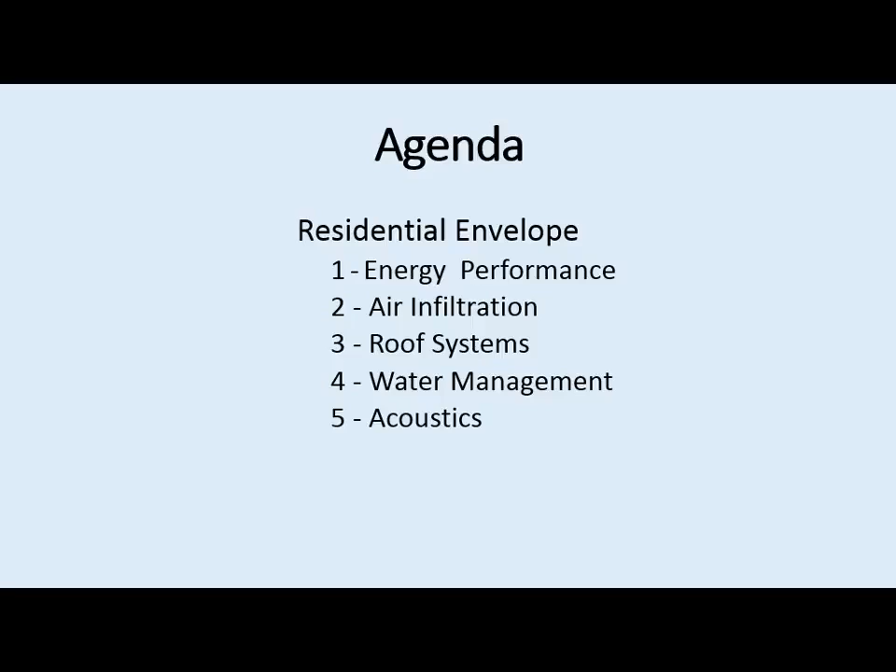I've identified 5 major subjects I'd like to cover, starting first with energy performance of the envelope, and then getting into the details of air infiltration, roof systems, water management, and acoustics.

In terms of energy performance, I've identified 3 major driving forces. First is energy codes, and I've spent a good deal of my professional career in the development of those. We also use economics, driven by fuel prices and construction costs. And we have environmental goals as a driving force for energy improvement.

If we want to talk about energy codes, we need a little clarification on definitions. The basis for energy codes are heating degree days base 65, cooling degree days base 50, and moisture levels - moist, dry, and marine.

Once you define the climate zone, we look at the thermal performance of the envelope in terms of its thermal resistance, or R value, thermal transmittance, or U factor, and the solar heat gain. This applies to fenestration, a term for light transmitting devices - not just a window, but it could be a glass block, or anything that transmits light.

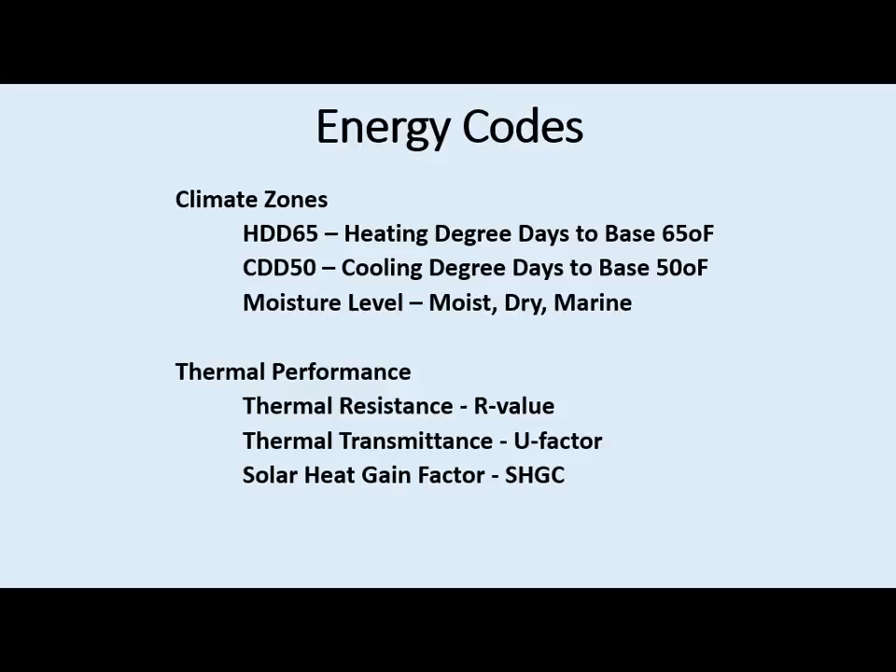So if we look at heating degree days, what are they? Starting with, on the left, we have heating degrees base 65. What does the base temperature refer to? Basically, it's the balance point of the house.

This was determined originally in the 1930s when people were delivering coal to homes, and they were looking for some weather measure to figure out when they needed to make the next coal delivery. They found that 65 degrees was a good correlation temperature, so that was used for many years and has defaulted into our current codes today. But it's by no means the balance point of a house today - a good energy-efficient house will have a balance point of much lower temperature than that.

The way it's calculated is you look at the daily average temperature, shown as a dotted line on the left side for heating, with the 24 measurements for the day, and then the average is the dashed black line. In this example, I'm looking at 40 degrees as the average temperature. Our base is 65, so for that day we have 25 heating degree days. Each day of the winter we add those up, and that becomes the seasonal value.

Well, 24 measurements seems like a reasonable way to calculate the average, but it's entirely too sophisticated. So what's done is they take the maximum and minimum temperatures and average those to come up with the daily average temperature. The reason is that they don't have 24-hour measurements at all the weather stations - they have first-order stations which measure hourly temperature, about 1,000 of those, and second, third, and fourth-order weather stations that only measure max and min temperatures. That defines the heating side.

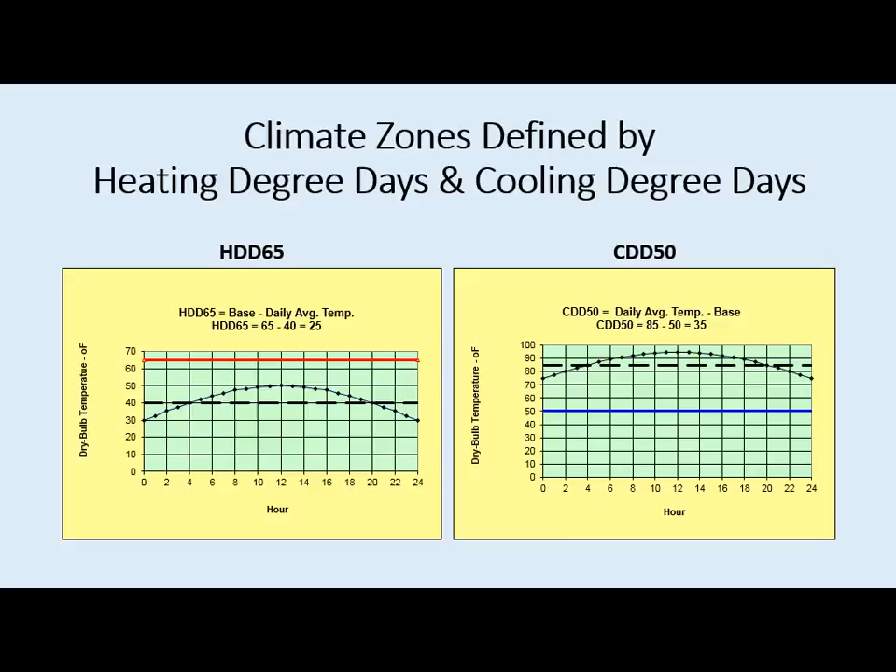But how does that compare to the long-term averages? I looked at the historical data for Columbus - on top we see the heating degree days, and they're quite variable, and same way for the cooling degree days on the bottom.

So for codes work, we use a long-term average. The first set of codes used a 30-year average of the weather data to set the codes. More recently, we've gone to 15-year weather data, and we're seeing a change in what the codes look like because of that.

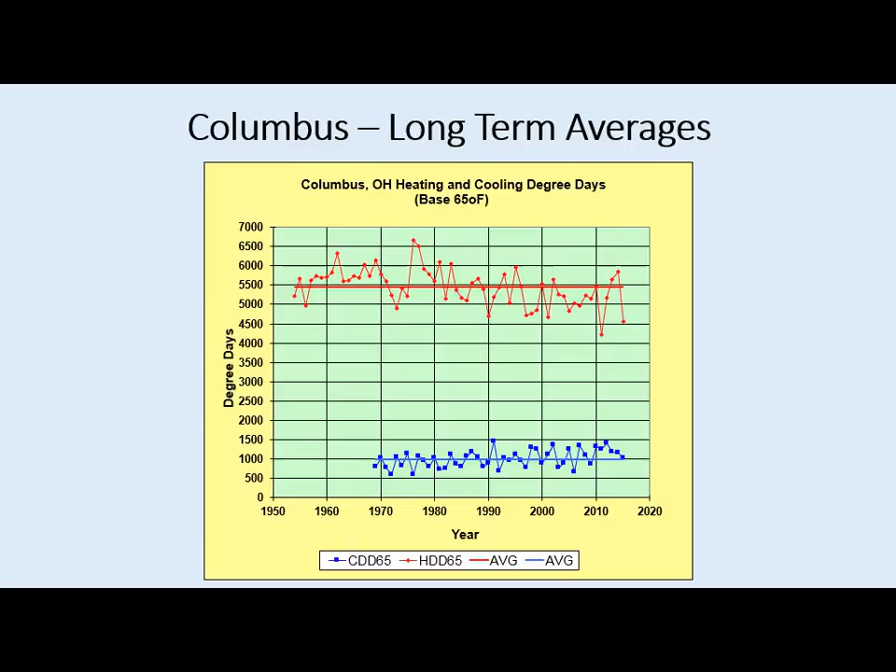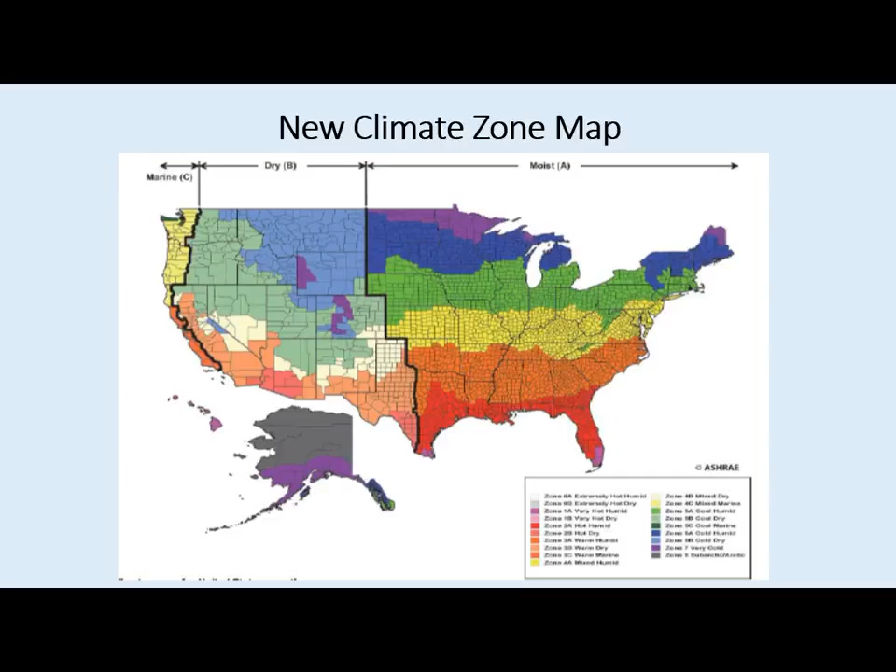So that has changed. There's still the same number of climate zones, but where they are has shifted. For Ohio, what we see is between the old or the current code, which has 9 counties along the Ohio River in climate zone 4, in the new code we're going to have 24 counties in climate zone 4, Franklin County being one of them that has changed from climate zone 5 down to climate zone 4. So it's gotten warmer in Columbus. That changes the criteria.

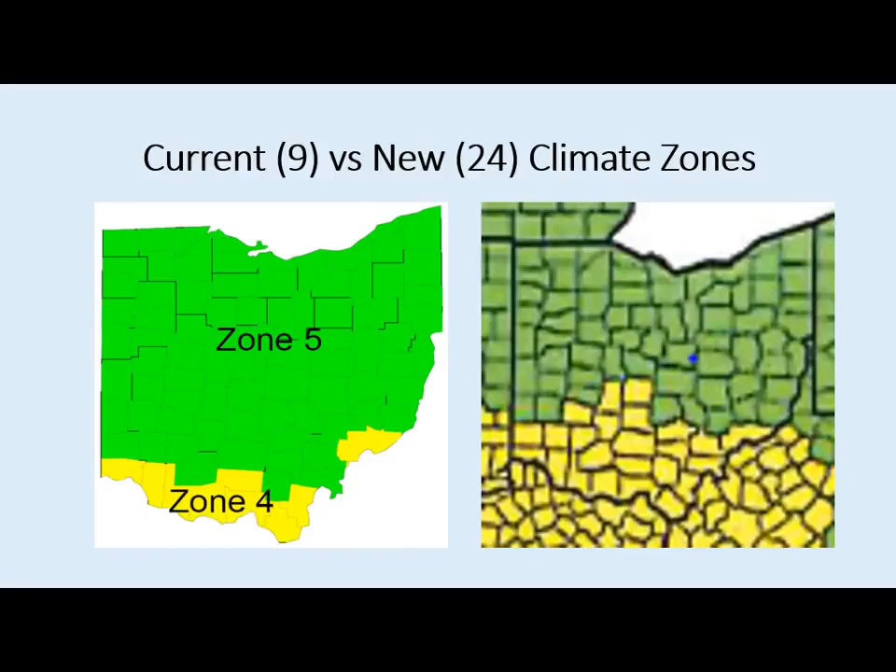The way we represent that is a map showing heating degree days on the horizontal axis, cooling degree days on the vertical axis. I plotted 4,000 plus stations in the U.S., and in the center of it are all of the locations for Ohio. The little yellow triangle shows the original version of Columbus, and the dot shows the current version. It just crosses the line at 5,400 heating degree days. That's what changed it from climate zone 5 down to climate zone 4.

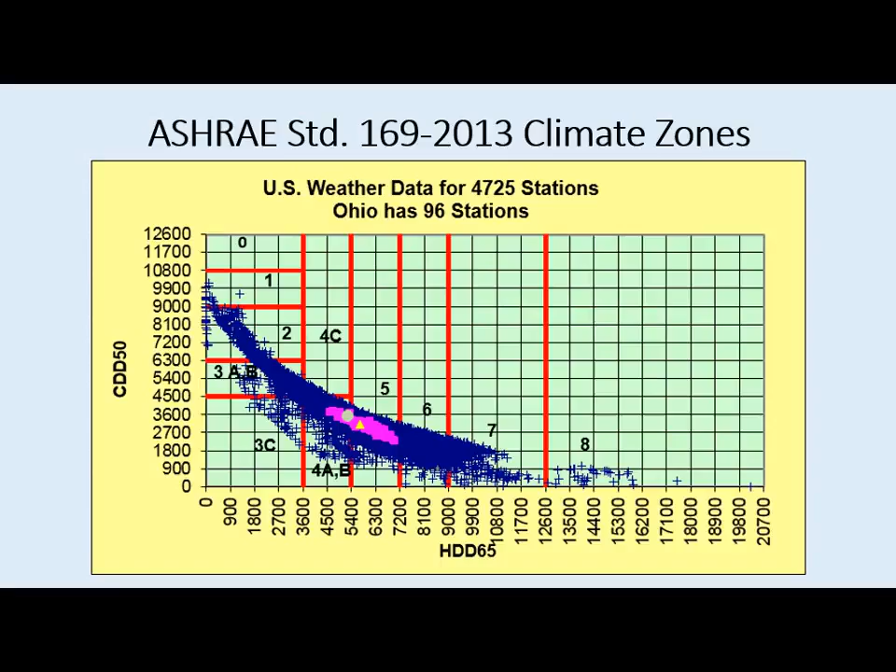So if we look at the first energy code in the United States, it was published in 1975 following the 1973 energy oil embargo. The goal was to eliminate the lowest 20% of the housing stock that was being built at the time. That was developed by a committee within ASHRAE of 100 people, 10 subcommittees, 10 people on each subcommittee, and they used professional judgment to set that criteria.

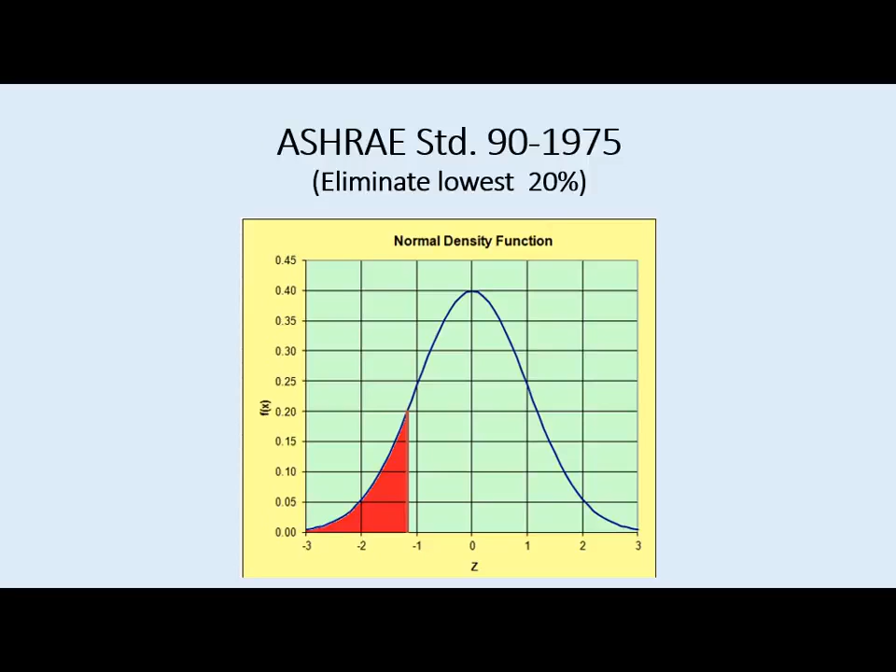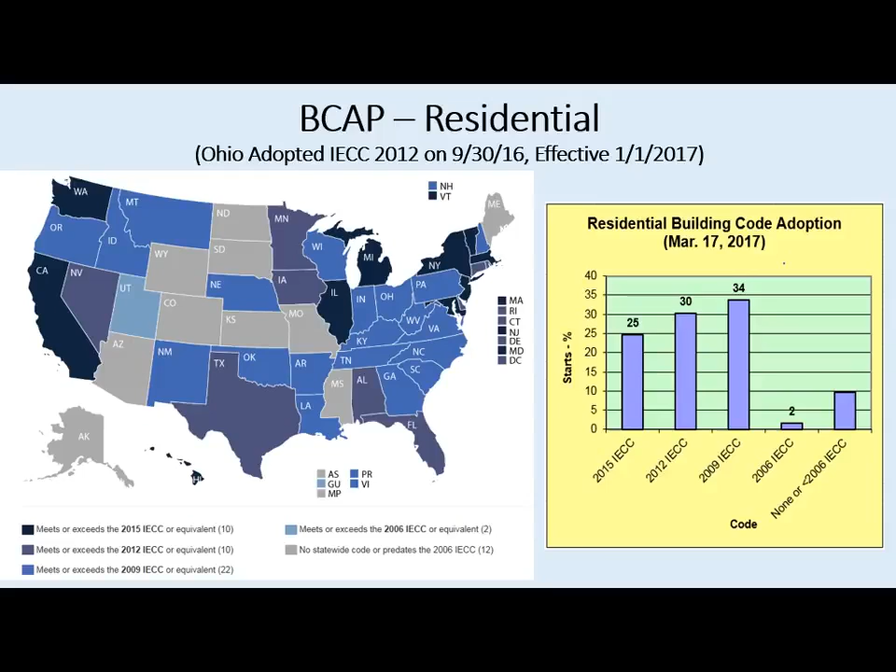So we see that the predominant adoption is still at 2009. We're seeing increases above that, but we also have the laggards. We have a couple of locations where they're using the 2006, and then we have about 10% of the housing starts are covered by no code at all. So there's still a lot of opportunity for improving energy performance just in code adoption. This has become a recent focus of the Department of Energy to encourage states to maintain current versions of energy codes.

An 8-inch concrete block has an R value of about 1. Also, 8 inches of solid concrete has an R value of about 1. So when you build your foundation, you're not getting a lot of thermal protection from the masonry units themselves. Carpet is 2. If you look at a double pane window, we're getting an R value of 3. A 2x4 stud, which is a common construction material, is a little over 4. A 1-inch XPS insulation board is R5. A 2x6 stud is almost 7.

Then you get into insulation, and depending on the density, a 3.5-inch thickness cavity can be 11, 13, or 15. A 6-inch cavity can be 19 or 21, and 12 inches can be an R38. So this kind of calibrates you on the values that appear in the energy codes themselves.

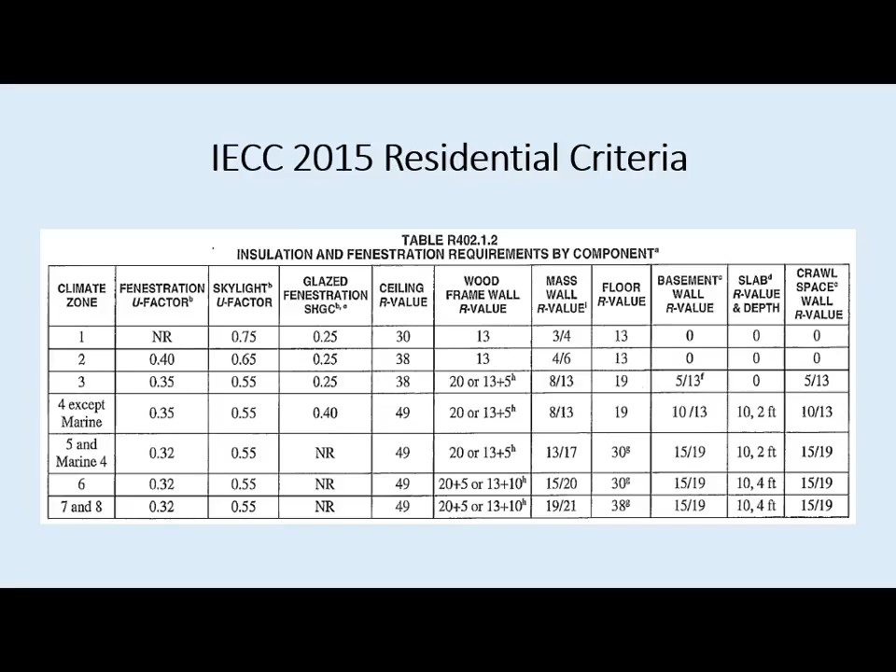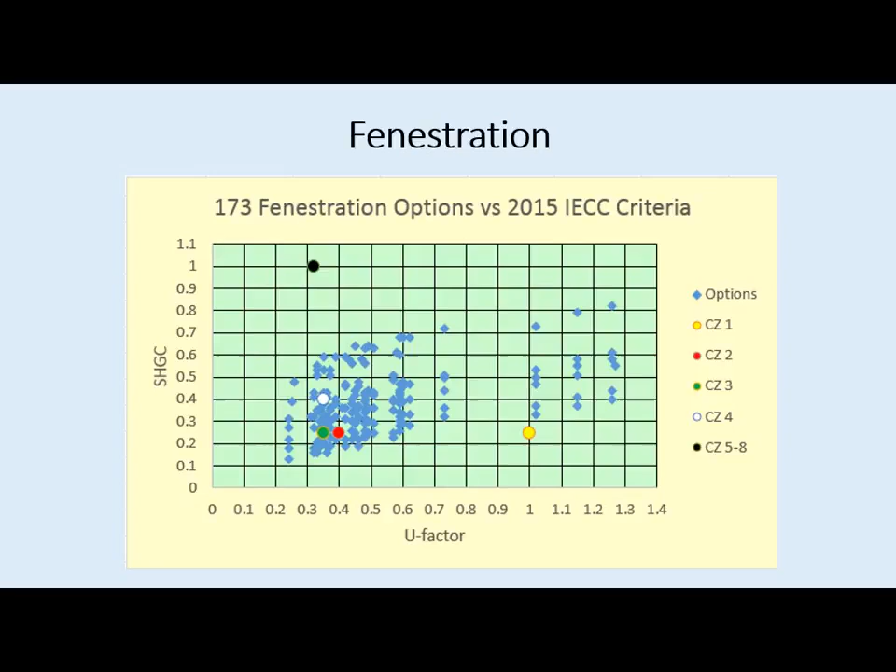We have similar trends in climate zones 2, 3, and 4. When we get to climate zones 5 through 8, we've got the black dot, showing a solar heat gain factor of 1 - there's really no requirement to reduce solar heat gain in cold climates. But to meet the U factor, you're going to have a solar heat gain factor on the order of 0.6 or less. So the codes are set not to limit construction options, but to give you choices.

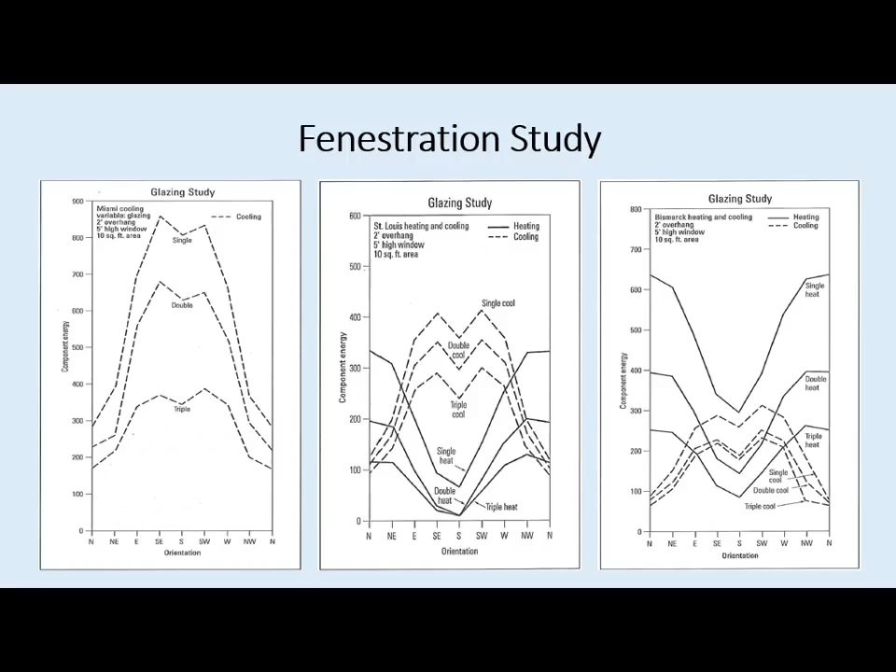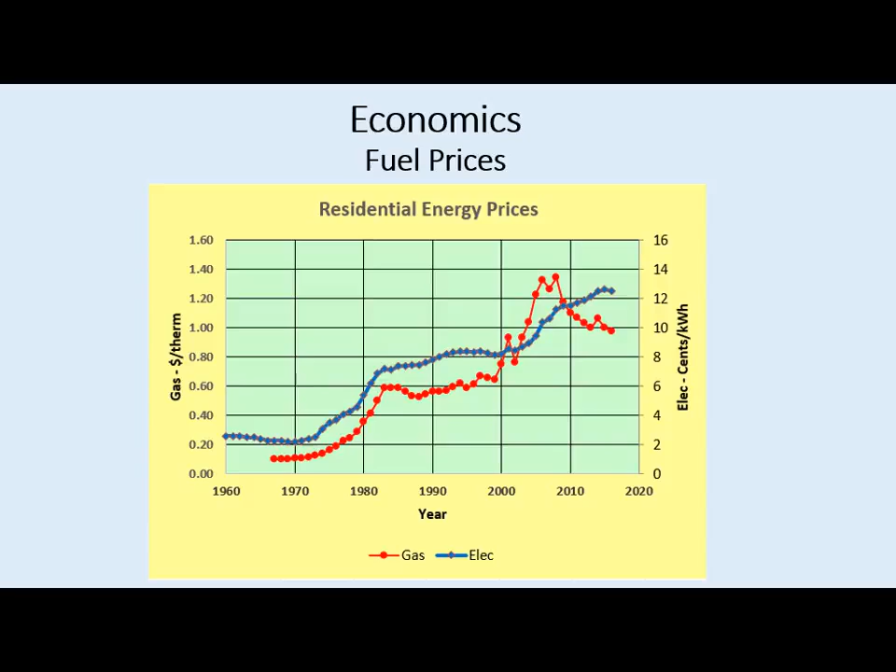Then we see this issue of gas prices - they peaked and have come down. That's been due to fracking and other exploration activities in the U.S. that have lowered our price for natural gas. But we account for that in the development of our codes and standards.

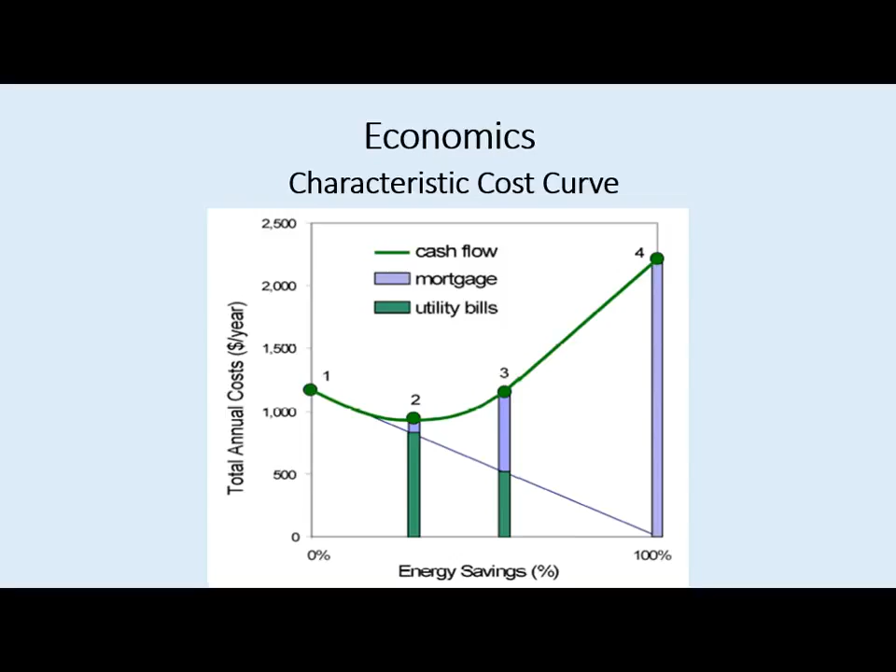We go through that and look at point 2, and that's characterized as the minimum of the cost curve. We look at point 3, and that's where we've reached cost effectiveness of conventional installations. To go from point 3 to point 4 is another step in terms of technology - primarily renewables.

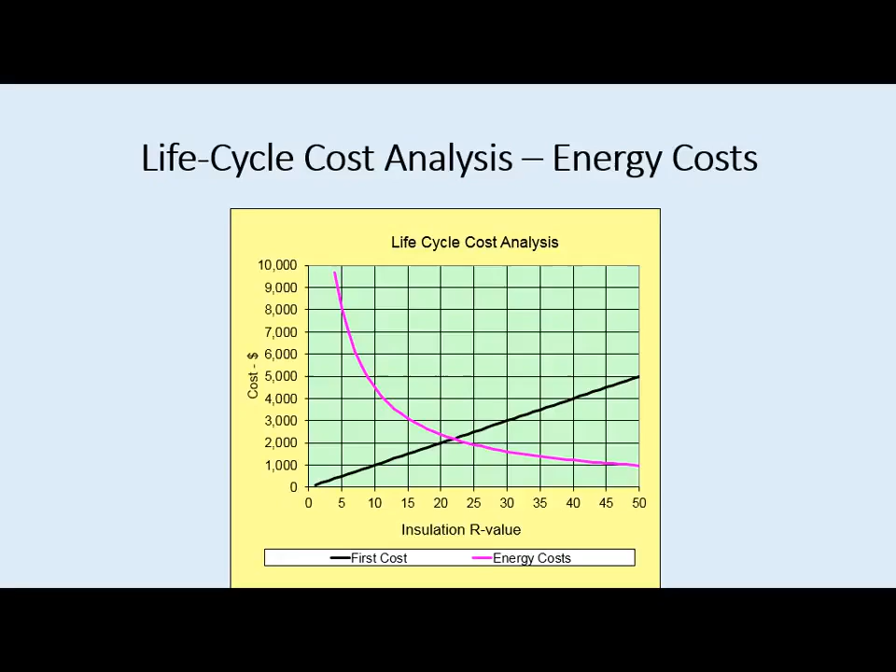These are the life cycle costs. When looking at energy costs, we're looking not just at energy today, but projecting energy costs out 30 and 50 years ahead. If you can do that with any confidence, I'd appreciate having that information, because it's always quite controversial. For first cost, we also look at the impact of assuming it's being mortgaged - interest rates and tax considerations are all accounted for in that first cost curve.

So these are the life cycle curves, and what we do is take these two curves and add them together point by point. We come up with the green line, and that's the optimization curve we use to set the criteria. What we see is that it reaches a minimum point, which we refer to as the optimum - in this case, a value of like R21. We do this calculation for each climate zone because it changes with weather.

What climate zone is this? This is just an example - I think it was done for Chicago.

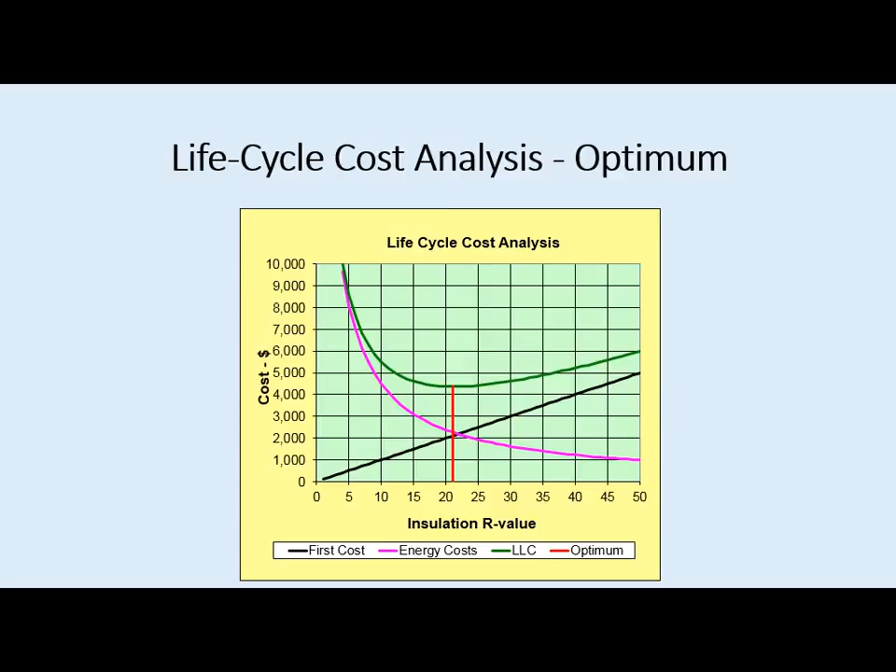When we're setting the codes and standards, we realize that the optimum may not be consistent with how it changes from one climate zone to the next, especially with discrete products. So this is where the committee uses their professional judgment, and we could have options on either side of that optimum. I've shown an exaggerated view of point A and point B. It may not be that far apart, but the point is they both have the same life cycle cost.

So from our perspective in setting the codes and standards, the end user should be neutral. Their life cycle cost is the same. The question is, how does that change from one climate zone to the next? Is there a progression that makes sense?

So we go through and we set those values, and in all the code work we do, we have to send that out for public review. We get comments, and we have to respond to those comments, so we get proposals to change them one way or the other.

So we have two driving forces here. If you're the builder, you want to minimize your first cost, so you'd pick point A. He doesn't care about the utility costs; that's somebody else's problem. If you're the homeowner, you might be concerned about point B. I know that energy prices are going to increase, so I might want to spend more and have those advantages, not knowing with any certainty what the fuel prices are going to be.

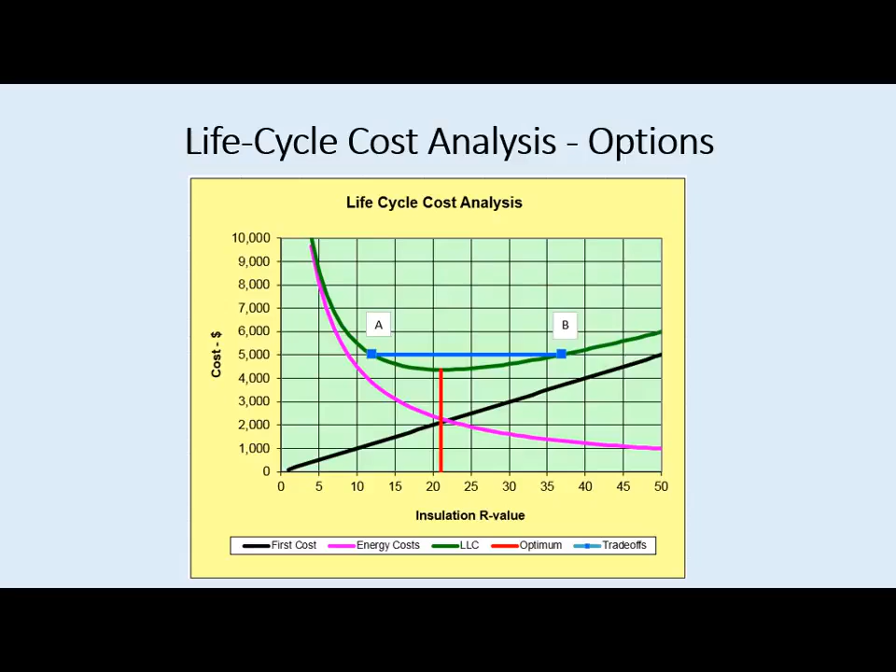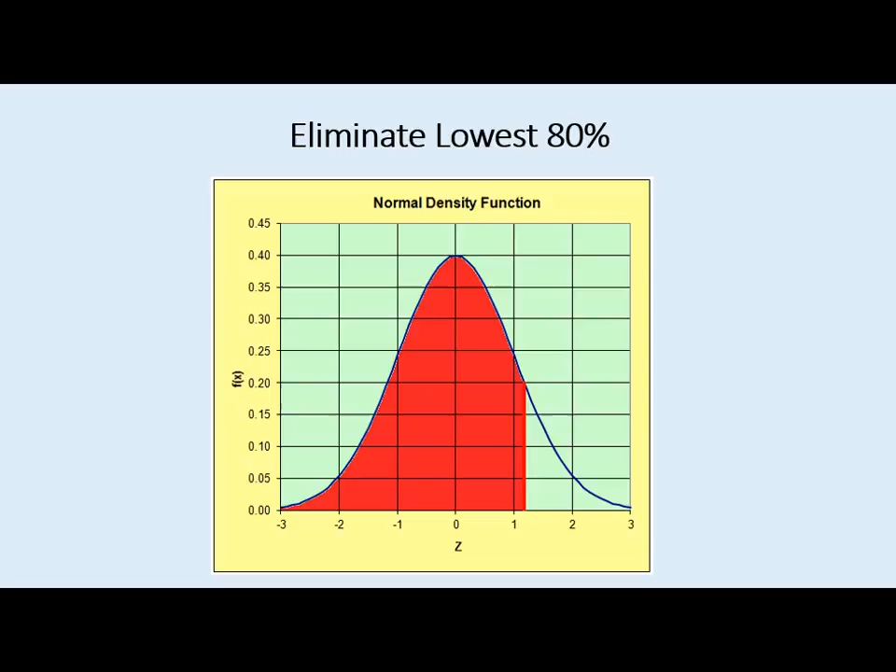So that's the choices we make in setting the standards themselves. In going through that process, we feel that we've designed the home. Now we're talking about the 80% of homes that are normally built. So we're requiring that you're building a much better house today than you did in 1975 just to meet the minimum code. We affectionately refer to that minimum code as legally the worst building you can build. So it doesn't mean it's the best.

So the third major driver is environmental goals for setting codes and standards. The major driver for this has been what's referred to as the American Institute of Architects 2030 Challenge, developed by Ed Mazria from AIA. The goal is to have all buildings be net zero energy by the year 2030. That has been a major driving force in the development of codes. It has been aligned with and accepted by ASHRAE, AIA, USGBC, U.S. Conference of Mayors, and the state of Florida. So this is getting a lot of legs.

So what we look at is what has the energy savings over time been. Starting in 1975, we put this scale together, with the vertical axis showing 100 as the value of the standard in 1975. The standard didn't change for about 10 years, then we saw minor improvements. Then in 2006, when AIA came up with the 2030 initiative, the Department of Energy got involved with ASHRAE, signing a memorandum of understanding saying DOE would provide technical support to ASHRAE if we would work towards this 2030 goal. So ASHRAE embarked on that, and you can start to see a major decline in terms of energy use.

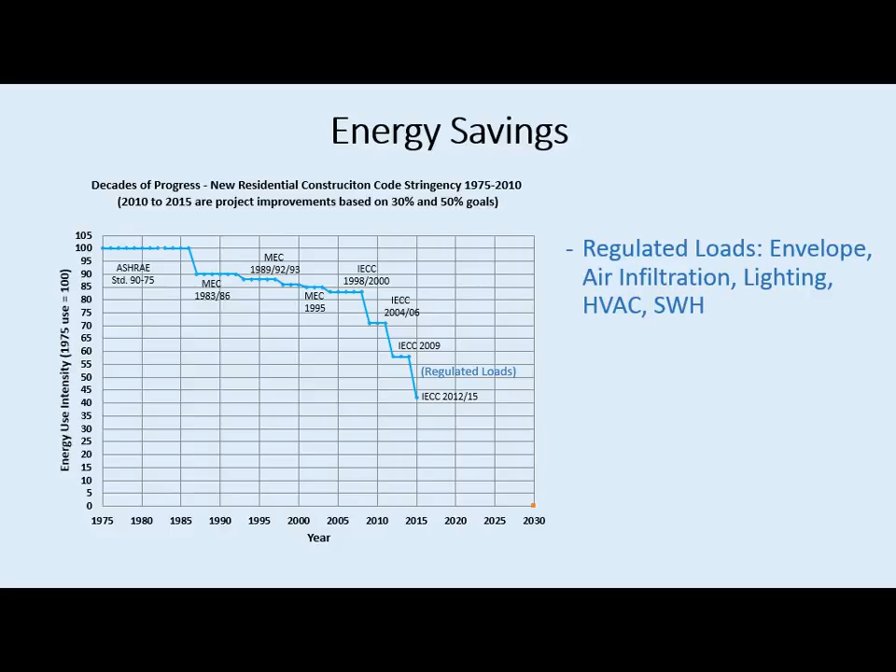That has taken us down to 2015, where we estimate we're around 40 on this scale. So we've saved a tremendous amount of energy with the impact of energy codes, but those only address part of the energy use of a house — we refer to those as the regulated loads, which include the envelope, air infiltration, lighting, HVAC, and service water heating. So what's left? How do we get from where we're at 40, down to this red dot at 2030, which is zero energy?

Well, the first step is to look at what we call plug loads — that's anything you can plug into the electrical outlet, so it'd be refrigerator, ovens, microwaves, a whole list put together. It may not be all inclusive, but one thing you can do is make those Energy Star selections, and that will help achieve energy performance. But they're not covered by the Energy Code. That's something the homeowner has to do after they move into the house.

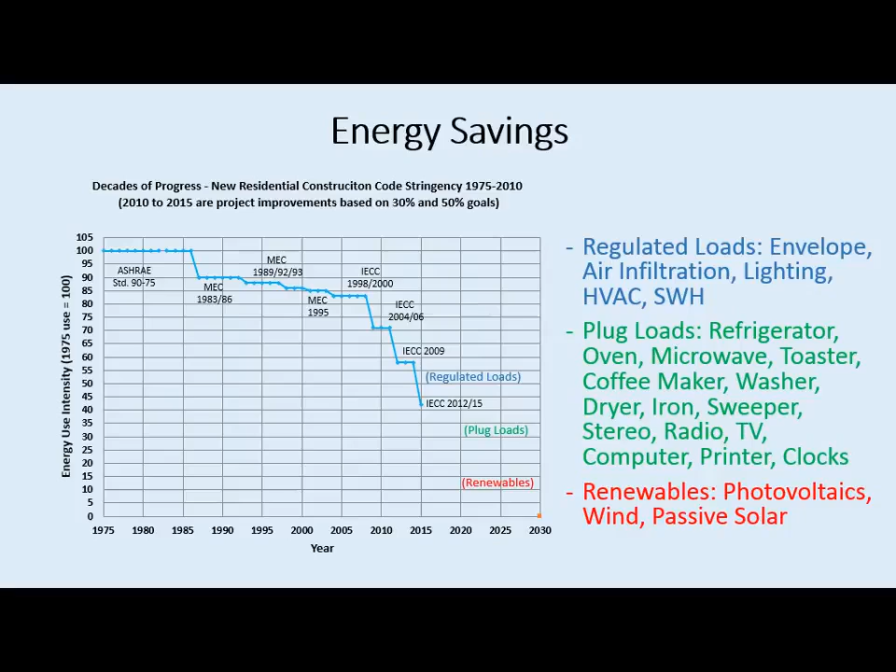So that'll take us down to some level. I don't know what it is yet, but to finish it off, we're going to have to go to renewables. And that's going to involve photovoltaics, wind energy, or passive solar designs. So those are the challenges confronting the codes and standards development.

So what do we do in terms of specific construction? Looking at particular options, we have concerns in the codes and standards with thermal bridges. A thermal bridge is a low thermal resistance path connecting two surfaces.

On the left, what I've shown is a typical 2x4 wood frame wall. We see that we put R13 in the cavity, and we have the wood framing member at R4. So collectively, those perform at about a composite value of R11. You add other construction to that - sheathing, siding, drywall, air film coefficients - and you get an overall performance of 18.6 for that wood frame wall.

Now you have an option - you could build it out of steel. When I first addressed this problem around the year 2000, I got a call saying, well, that steel's so thin, I'm just going to ignore it and assume I get the full R13 in the cavity. So I dug around in some of our research files and found some tests we had done, and I was shocked at the performance that was realized - that the R13 wall, in conjunction with that steel, performs at about an R6.

And I said, what's going on here? Was the test right? So I checked. Yes, it was correct. Did a little back-of-the-envelope calculation and found out that the steel is a factor of 1,000 greater in terms of its heat transfer than the insulation. So it doesn't take very much steel to create this huge thermal bridge in steel construction.

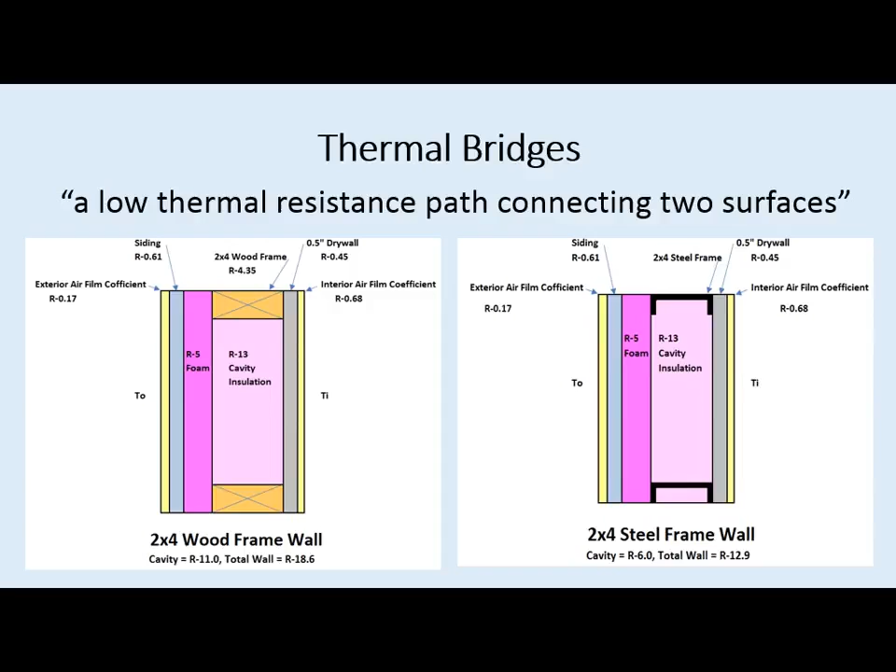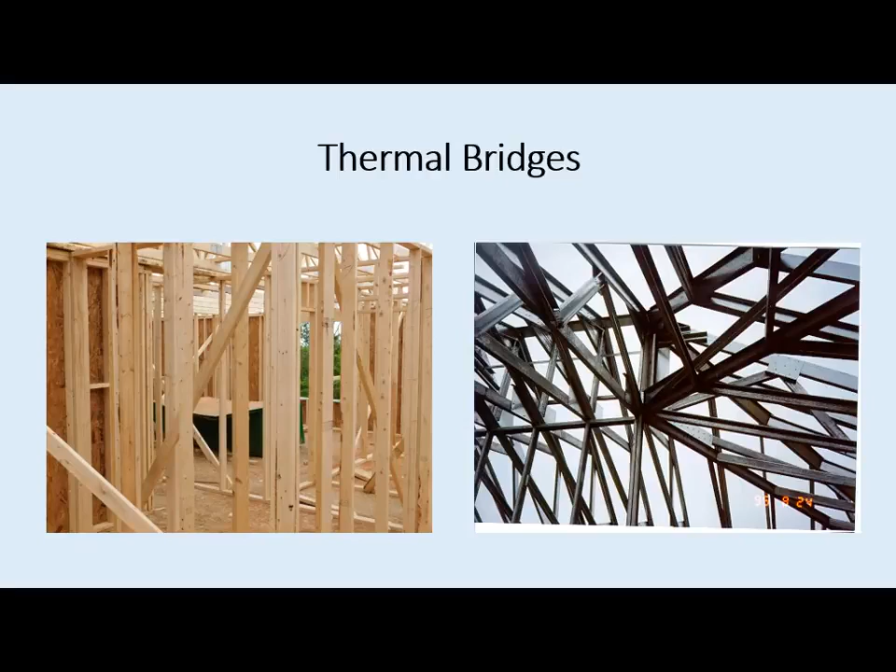So is that important? Well, if we look at how a house is built, we see a lot of wood, we can see a lot of steel. And that's a major difference in terms of the energy performance that's realized.

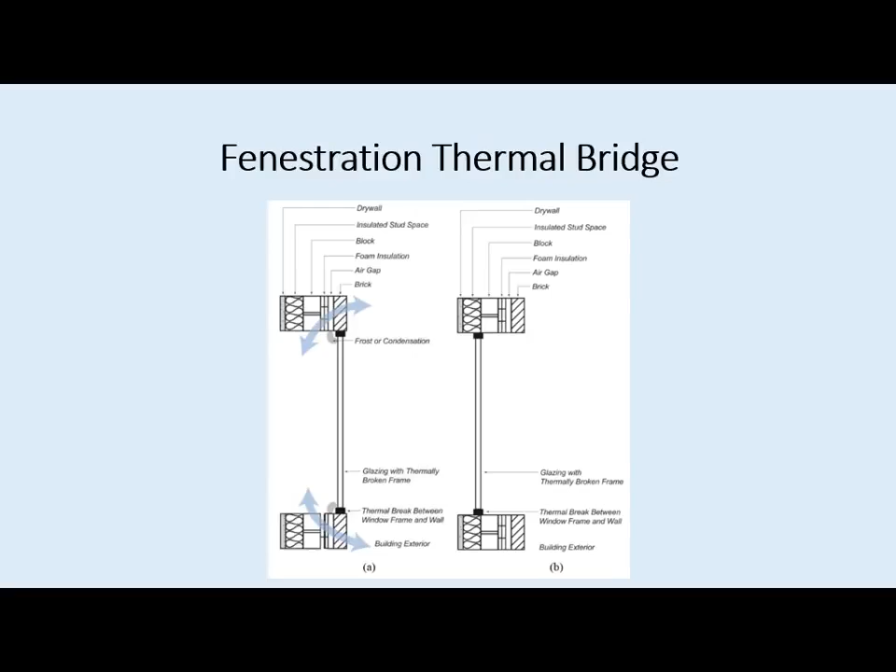Other thermal bridges to consider: when you install a window in a wall, where do you put it? The diagram on the left shows it installed on the exterior. You think, well, that'd be a good place to put it for drainage. But in terms of thermal performance, you'd want to install that in the same plane as the insulation to eliminate thermal shorts, condensation, and those sorts of problems as well.

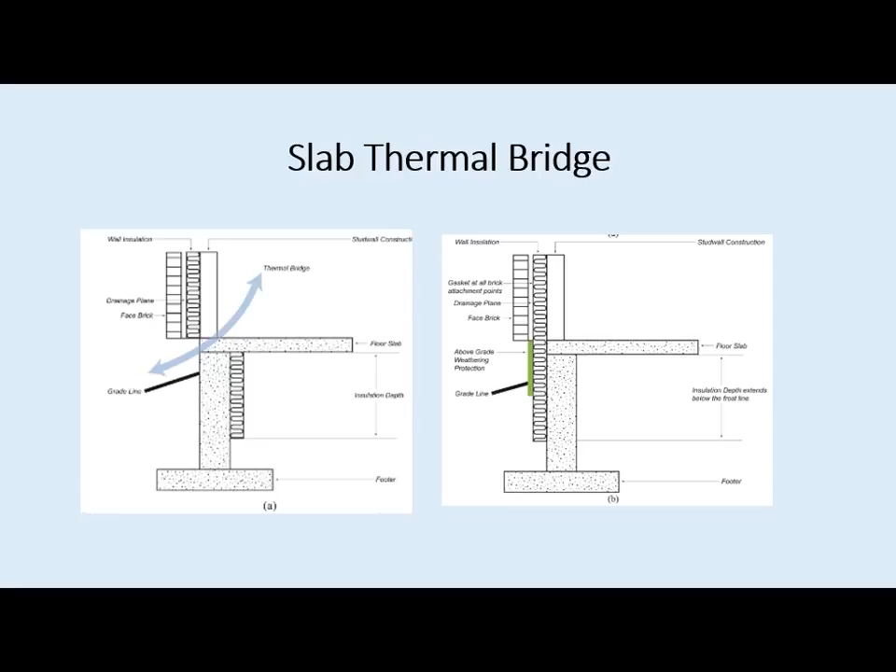Slab edge insulation - you exterior insulate the wall above grade, and below grade you insulate the interior. You think you've added the insulation, but you've created a tremendous thermal bridge, a short circuit. So the best solution is to have the exterior insulation run continuous. In order to do that, you have to provide some sort of protection for that insulation above grade. And a lot of people either don't insulate or don't do the protection right, so that can be problematic as well. But there are solutions to that problem.

Another problem is basement walls. Well, I'll insulate the basement wall up to the grade line, and I've covered 90% of the wall - that took care of that problem. But wait a minute, I told you earlier that basement wall has an R value of 1. That 1 means it's a tremendous heat conductor. So that insulation on the outside might as well not be there - it's doing virtually no benefit. The soil provides benefit; the insulation doesn't add anything to that. So you're bypassing all that insulation on the outside and the soil when you have that exposed above grade.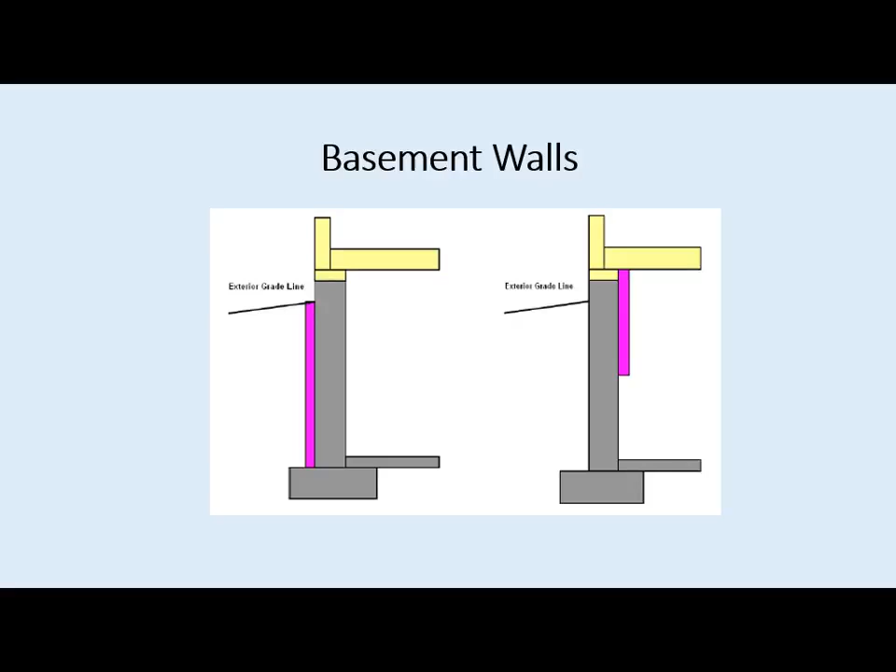Well, let's solve the problem - let's go inside and insulate on the inside, but we don't need to do the whole wall, we'll just go halfway down. Wrong. That vertical wall is R1, so you're just bypassing all that insulation again. So those two things you don't want to do. You think you've done the job right, but you haven't.

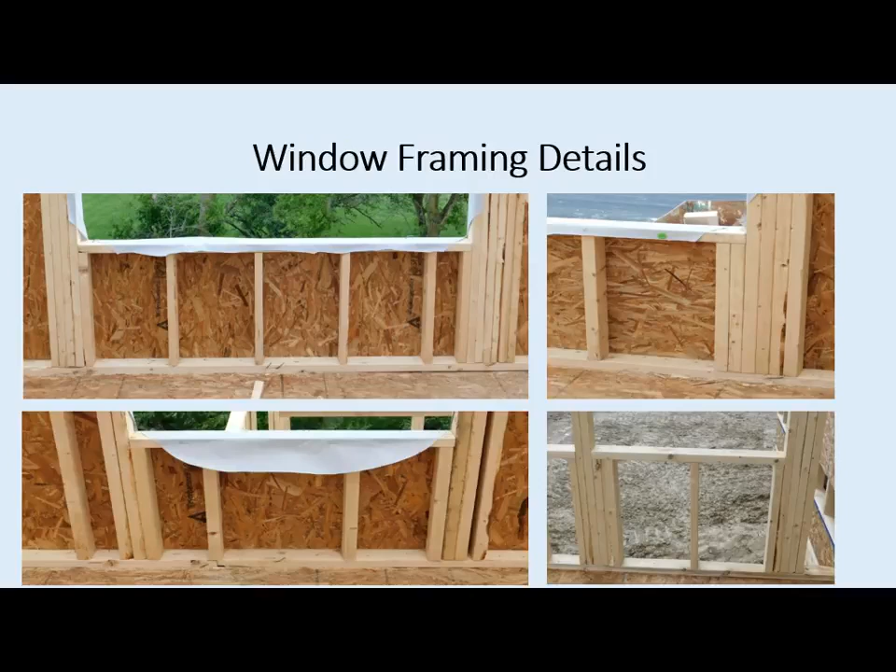You created thermal bridges. Well, I showed you the impact of wood framing. So if you go to a typical construction site, which I did to take these pictures, and look at what's being done today, the amount of wood that's used is incredible. I was amazed at what I would refer to as excess. And there are procedures called advanced framing technologies that you can employ that give you the same structural performance but not near the level of wood framing or these thermal bridges. It exists in windows, it exists in doors, headers.

No matter where I looked, there were multiple stud paths. So are there solutions to that?

Of course. What I've shown here on the left is a corner detail that involves 3 studs. It makes it difficult to insulate and gives you thermal bypasses. On the right is a 2-stud corner. That requires drywall clips to hold the drywall, but it's a technique that can be used, and it gives considerable thermal improvement.

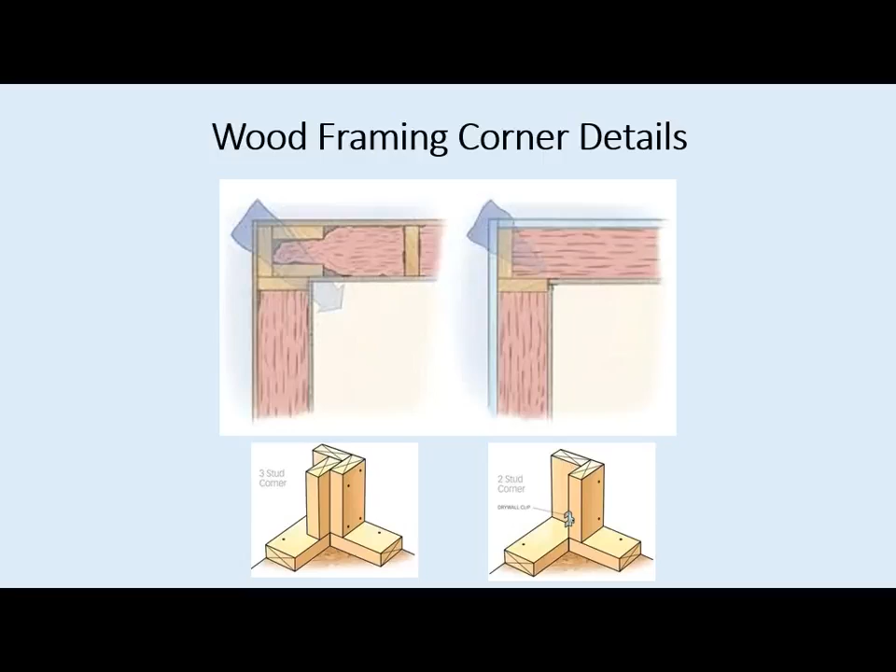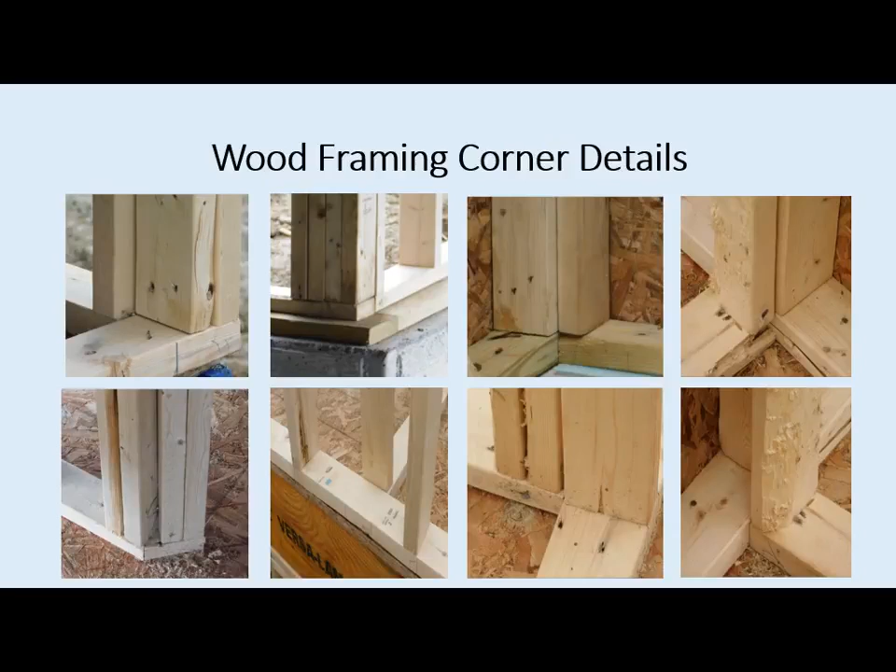So you go out and look at the typical house with all the corner details, and I didn't see any that satisfied what I would call good design. It just continues—the problems are everywhere I looked.

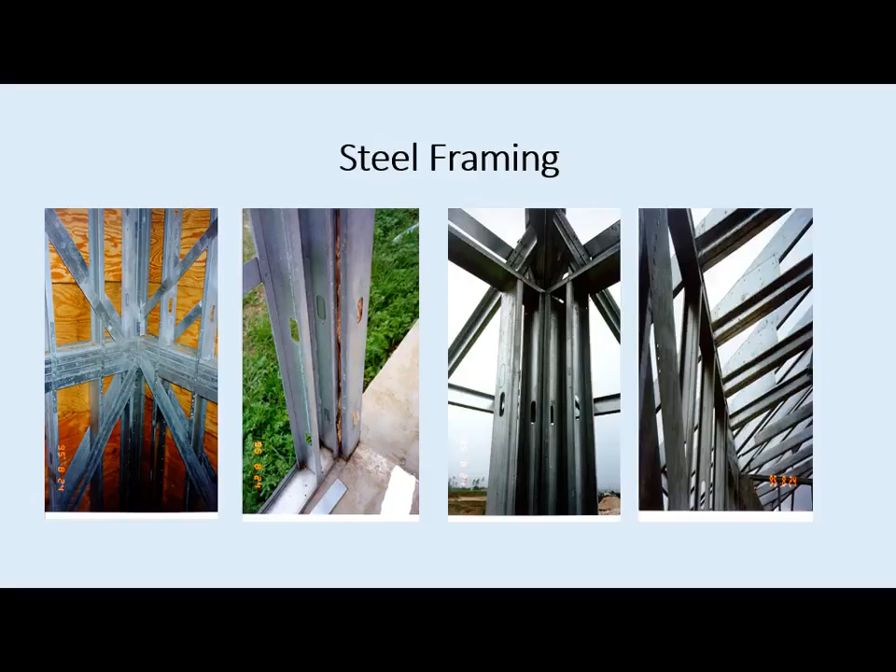Then I thought, well, how does steel look? The picture on the left is a stairwell, and what we see there looks like about 8 steel members. I don't think the front head of the Queen Mary was that strong—it's a lot of steel, a lot of thermal short circuiting, and very difficult to get energy performance in that construction.

So what are some of the solutions? One is if we look at eave construction—on the left we have a standard truss, and it comes down so the top chord sets on the bottom chord at the intersection of the wall. That compresses the insulation, and you install a red baffle bat to provide ventilation, but you're decreasing the thermal performance by having that compression.

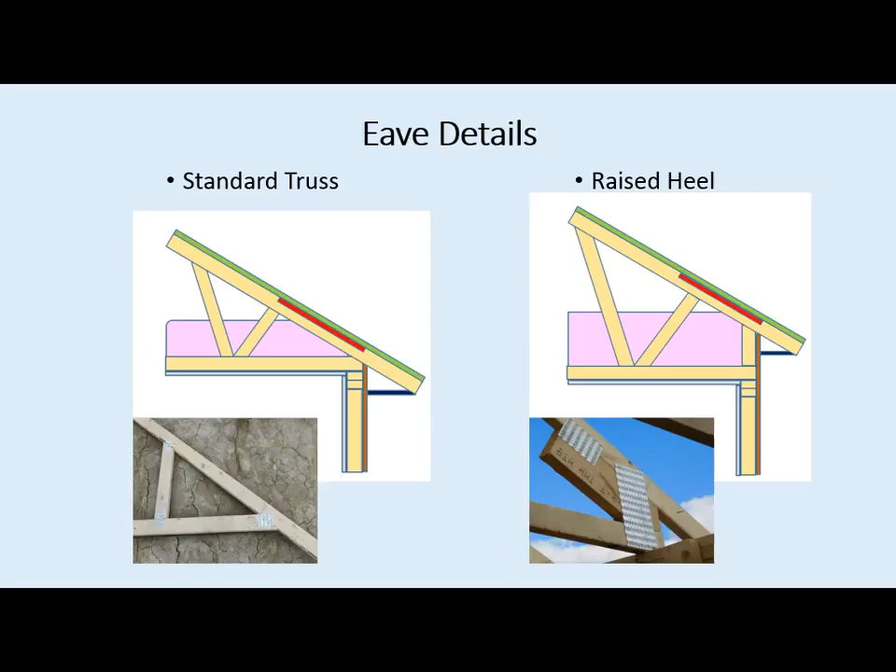So the solution is referred to as a raised heel truss. You build that up, allowing the insulation to become full thickness, clear out to the edge of the wall system, and you get the thermal performance you would expect.

One solution I showed on the 2x4 walls was foam board sheathing. You have options—you can buy a 1-inch foam board sheathing, or 1.5, 2, or 3 inches. In terms of codes, we set a maximum of 3 inches because of how you install something thicker than that. Trying to drive a nail through more than 3 inches is a challenge.

It could cost-justify 4 inches, but they said you can't build it. So if you have a choice, you can buy a 1-inch board and get an R5 in the XPS type of material, or an R6 in the polyiso.

Which one would you buy? Does it make a difference? Well, sure, the R6 is a better performer—I'll take that. Well, let's talk about that.

In the rating of foam boards, the Federal Trade Commission has what they call Rule 460, and it requires all manufacturers to rate their products at 75 degrees mean temperature. So when you do that, the XPS on the left is shown at 75 degrees to be an R value of 5, and the polyiso at 75 degrees is an R value of 6.

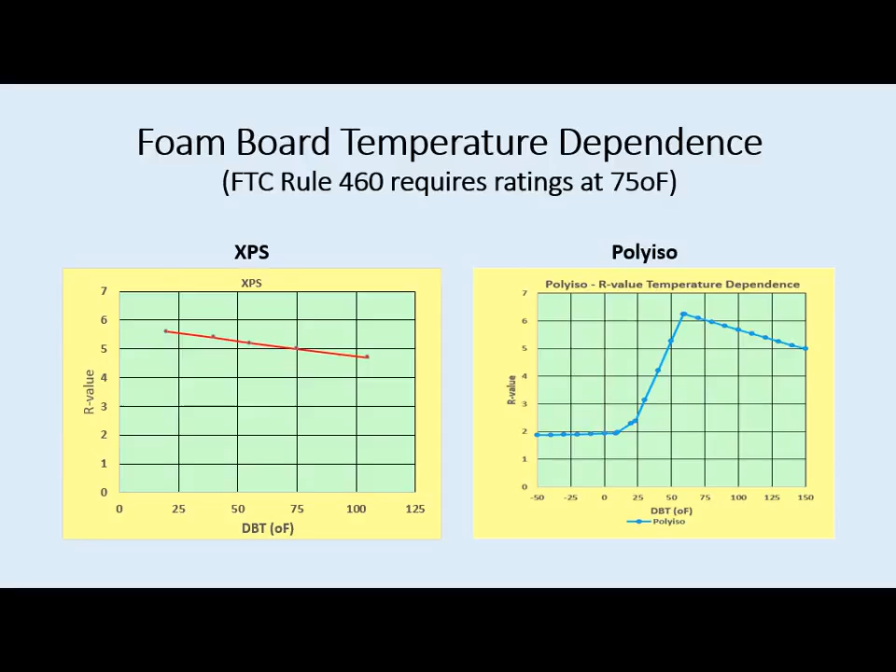But they're also temperature dependent. In terms of the XPS, as it gets colder, its performance improves. In terms of the polyiso, the performance improves up to a point, and then you see this dramatic drop when the blowing agent starts to condense.

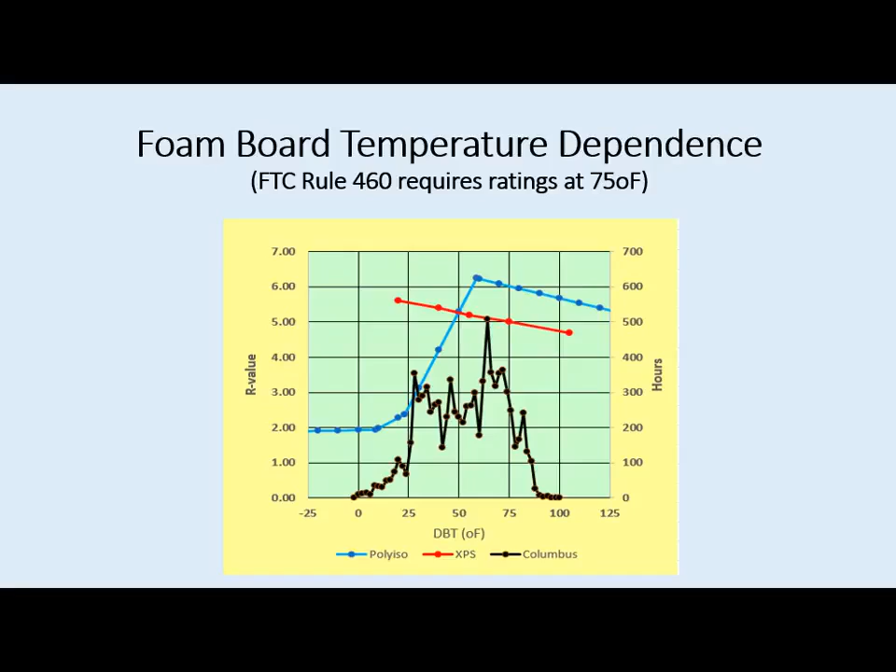We see a tremendous drop-off in the polyiso. So you can go through and do an annual calculation and show that the R5, the red line, gives you better overall annual performance than the R6. So you need to keep in mind product performance, not just at rated conditions.

Yes? I have a home with ICF, insulated concrete form, just 10 inches. How do you compare the performance of insulated concrete form and structural insulated panel to lumber construction?

Well, you have to go through and do that comparison on a U value basis. That's the other part of the standards—they list the prescriptive requirements in terms of R values, but they also list the performance factor in terms of U values. So if you meet that U value requirement, you're in compliance with any material, and that's why that option is provided in the codes. It gives you that flexibility.

So you'd have to go through and do those calculations and make sure you're in compliance with codes. Typically that's not a problem with those types of constructions—they're very energy efficient and have no problem meeting codes.

All right, the second major item I want to talk about is air infiltration. This is the flow of air from one side of the envelope to the other due to pressure and openings.

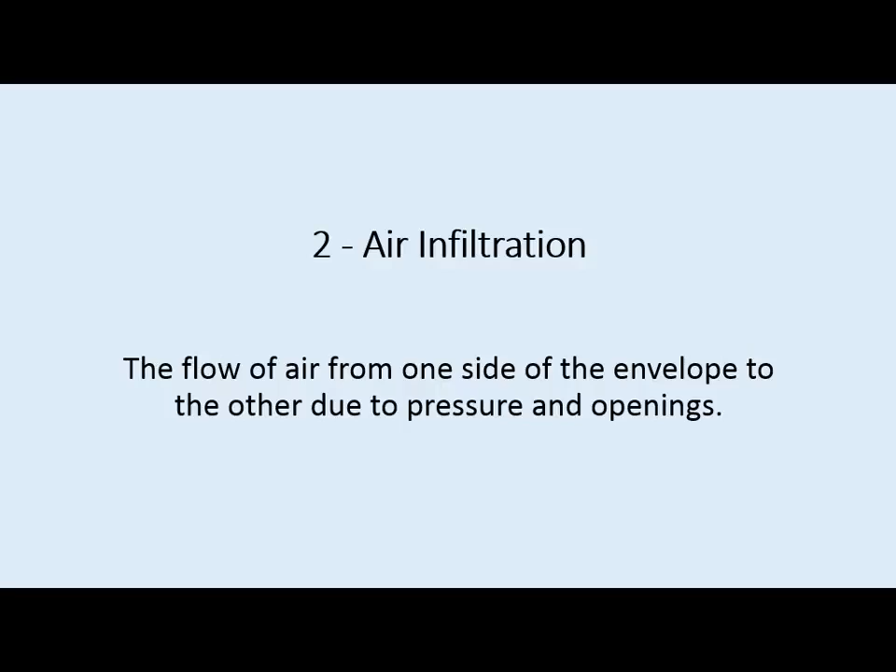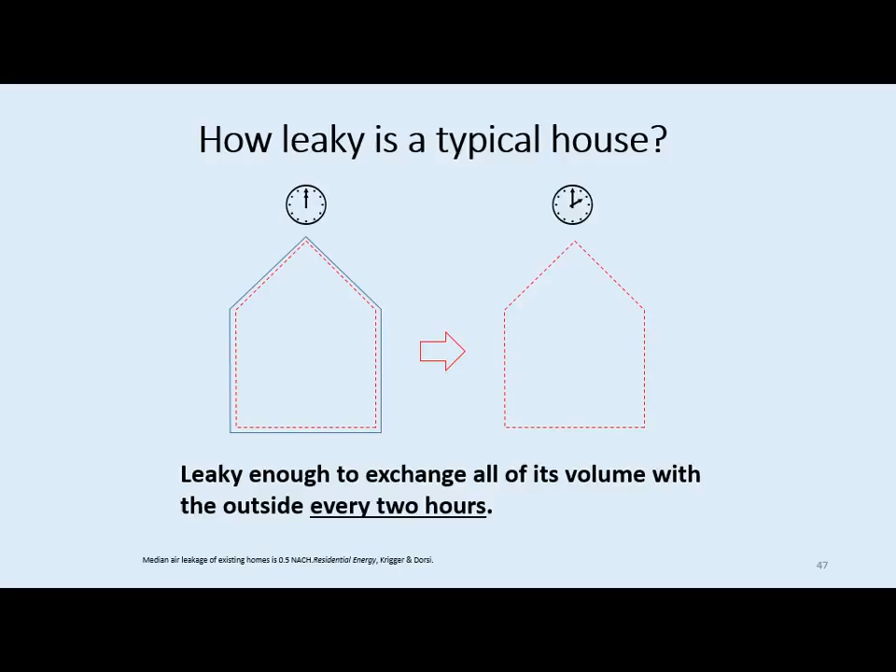So how leaky is a typical house? Well, typically it will exchange its volume every 2 hours, but we're setting codes to be more stringent. So what's the energy penalty? It's a function of climate, size, leakiness, and many more factors. It accounts for between 25 and 40% of the energy use of your house, so it's something you need to consider.

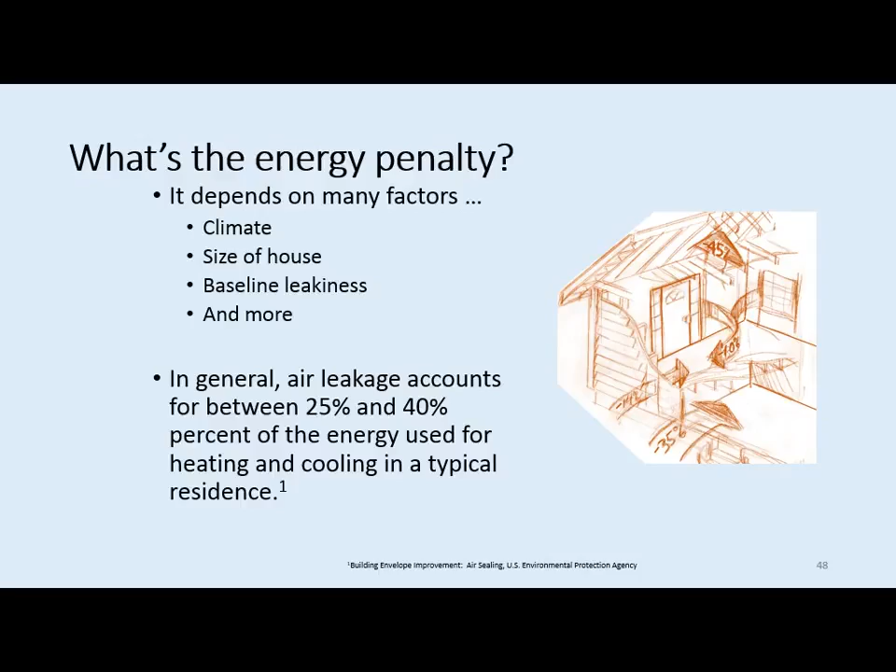So how do you test that? With a blower door. You pressurize your house and take measurements, and now the codes have set requirements. For climate zones 3 through 8, it requires 3 air changes at 50 Pascal. Well, what does that mean?

You have nearly a mile of joints in a house to connect. Which ones are the most important?

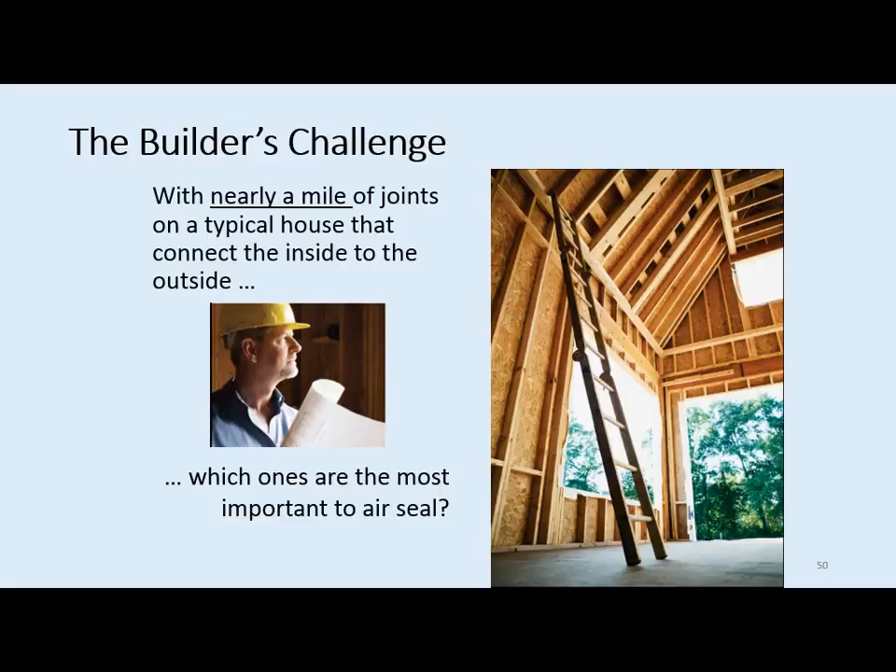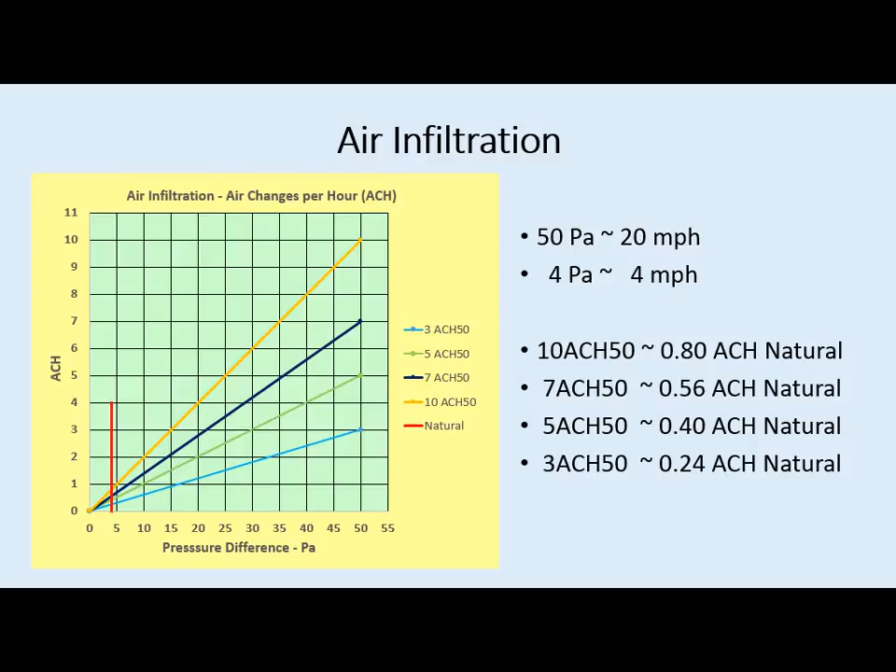The infiltration requirement for the IECC was 3 air changes at 50, and that 50 is comparable to a 20-mile-an-hour wind. Now, you're not going to have that in your house on all surfaces, but it's a pressure test that we do, and we extrapolate those results down to 4 Pascal. That corresponds to about 4 miles per hour, which is more representative of what you'd see in a house, and we refer to that as natural. So at 3 air changes at 50, we're looking at about a quarter of an air change per hour to meet the code.

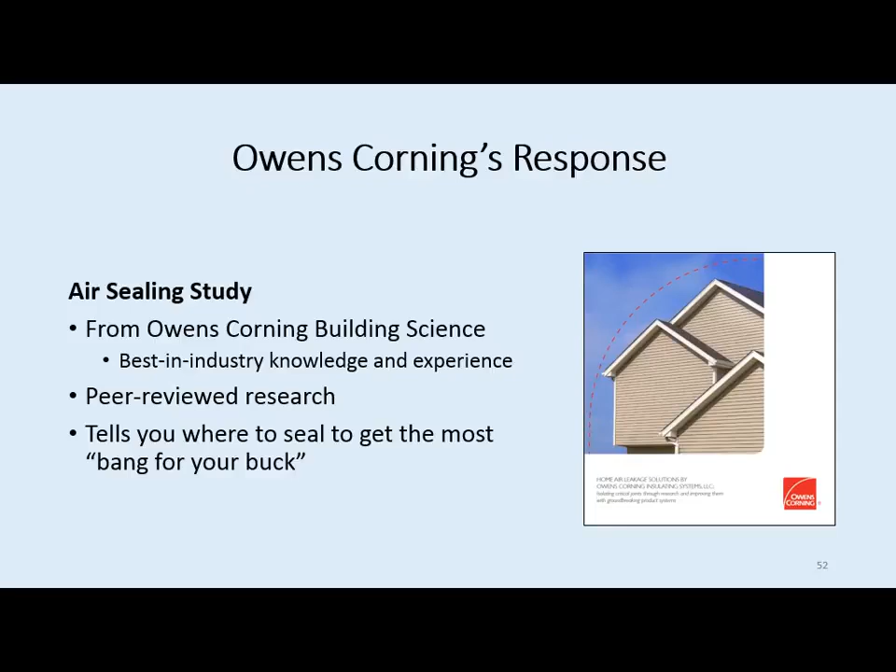The third item is roof systems, and we want to look at how they need to breathe. You need to have ventilation in attics. You want them to defend your attic from moisture, snow, and rain, and you want to seal them from drippage back into the space itself.

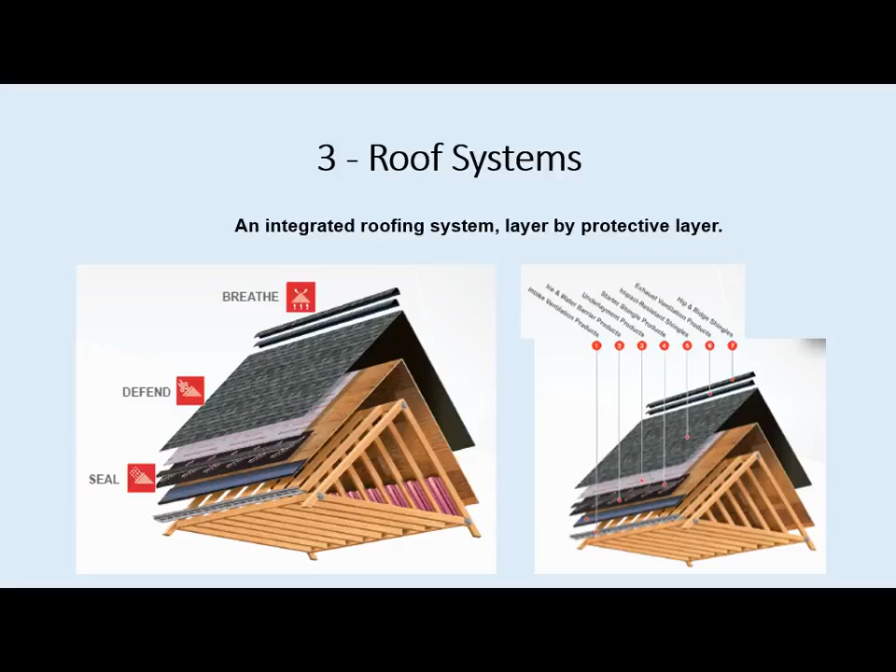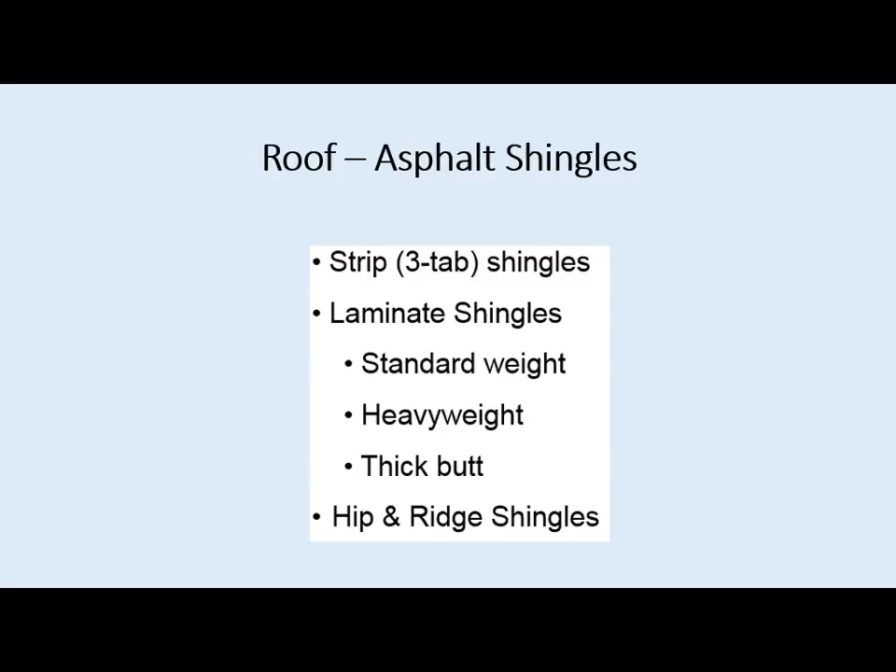So you have choices. In terms of asphalt shingles, you can have a 3-tab shingle, laminate shingles of various weights, and hip and ridge shingles. These give you different levels of durability in terms of length of life.

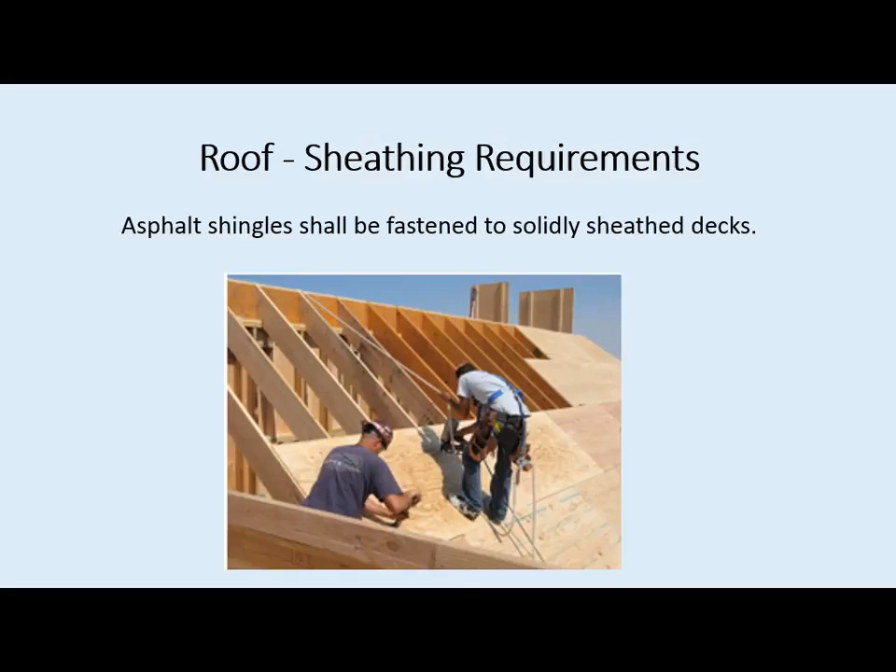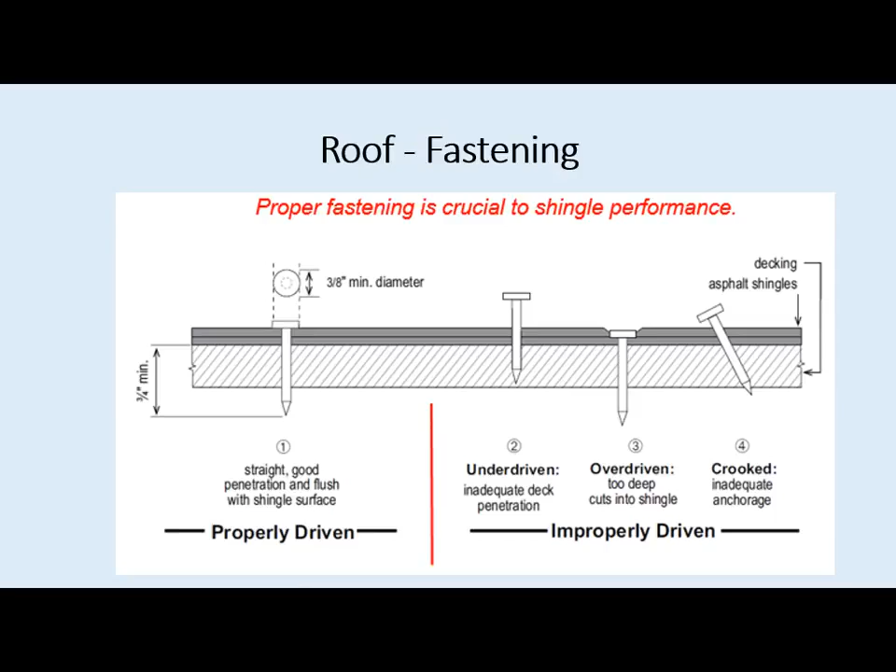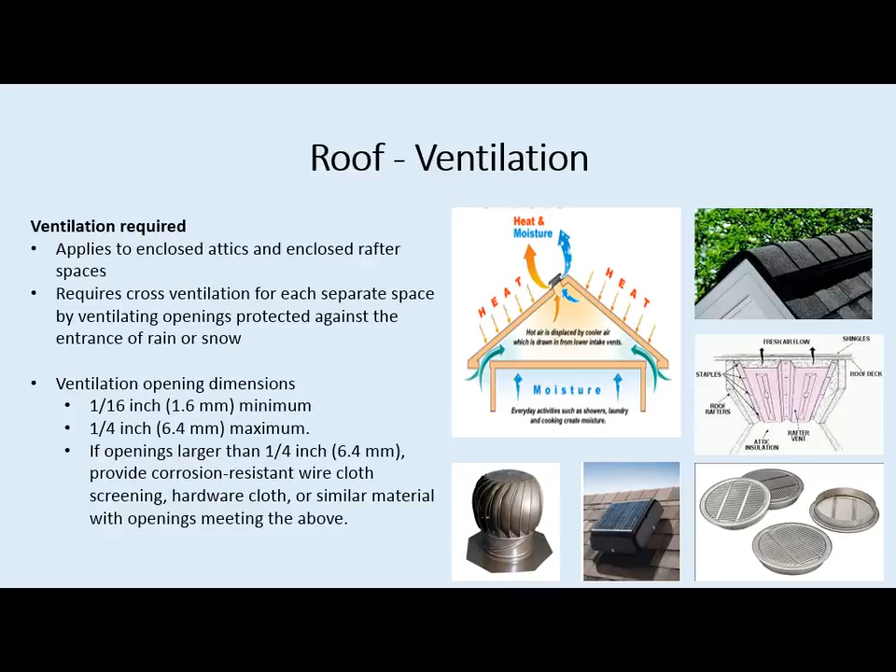Ventilation is a major requirement for roofs, and you do that by having air enter at the eaves—you can have strips or little caps, shown on the right, to provide that ventilation. It goes into the attic space through those vent cavities I showed earlier on the hip roof, then exhausts near the top, which can have ridge vents, shown in the drawing on the right, or little louvered mechanical devices shown below the figure.

We also want proper wind resistance, which changes by climate zone, so different tests are conducted on shingles and different constructions are built for different areas of the country. You need to keep that in mind when selecting materials. You also need to look at impact resistance for hail—you don't want that to destroy your roof—so we conduct tests to protect against impact resistance.

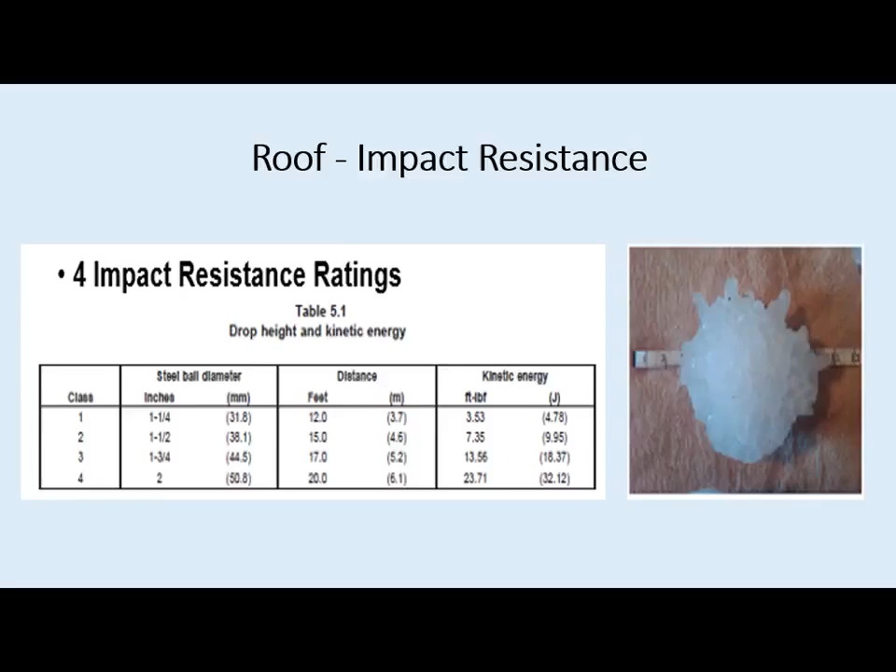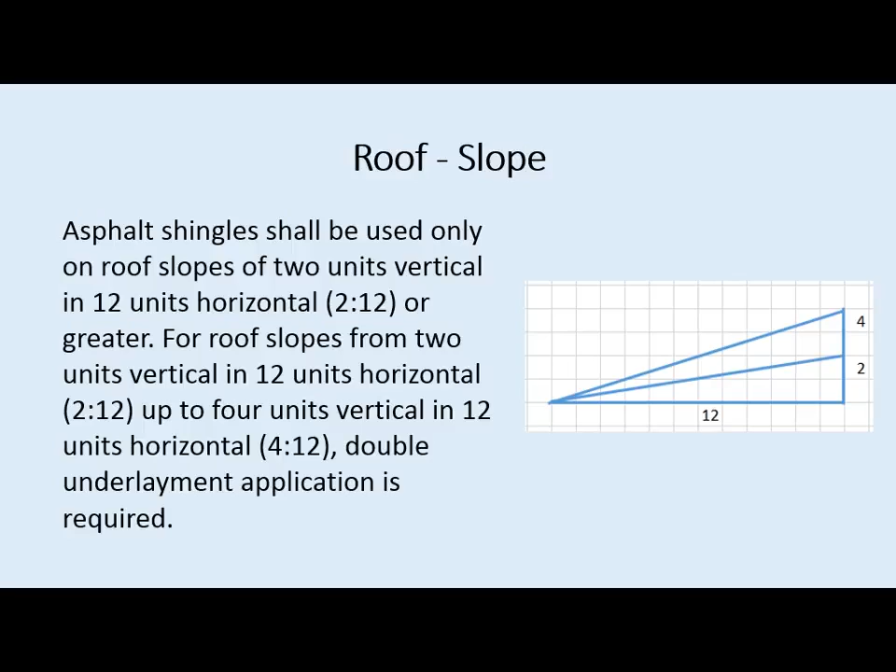Finally, shingles can only be applied if the roof pitch is greater than 2-in-12. Between 2-in-12 and 4-in-12, double underlayment application is required. Above 4-in-12, a single layer is sufficient.

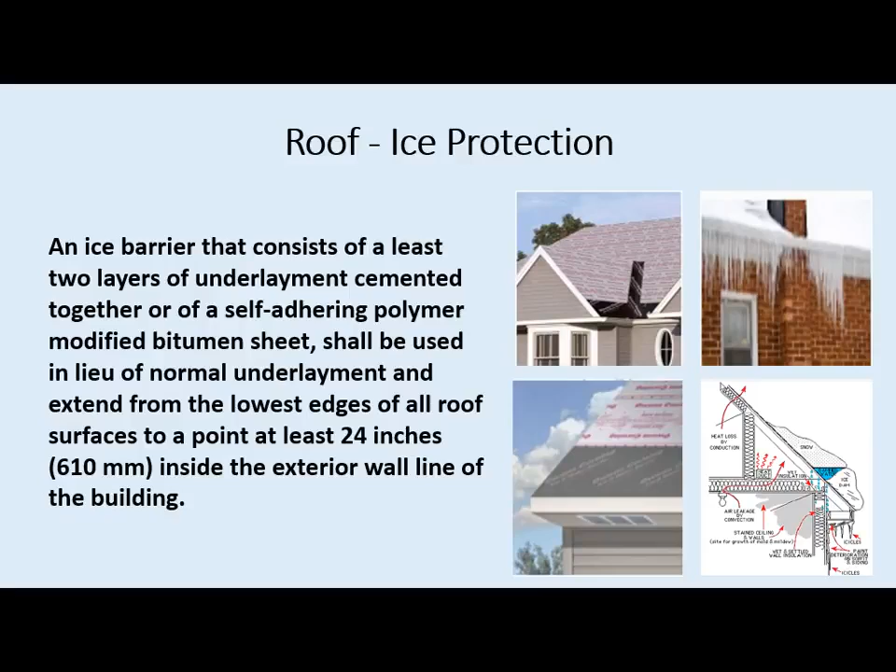You also need ice protection. I talked earlier about ice dams, and if those occur, you'd like to avoid them in the first place. With proper thermal design, you can certainly minimize those, but you want to have drip edge and underlayment installed so that if you do encounter that, the water isn't coming back into your attic. There are details on how that's supposed to be installed. Finally, we conduct tests on fire, another important factor in the design of a roof system.

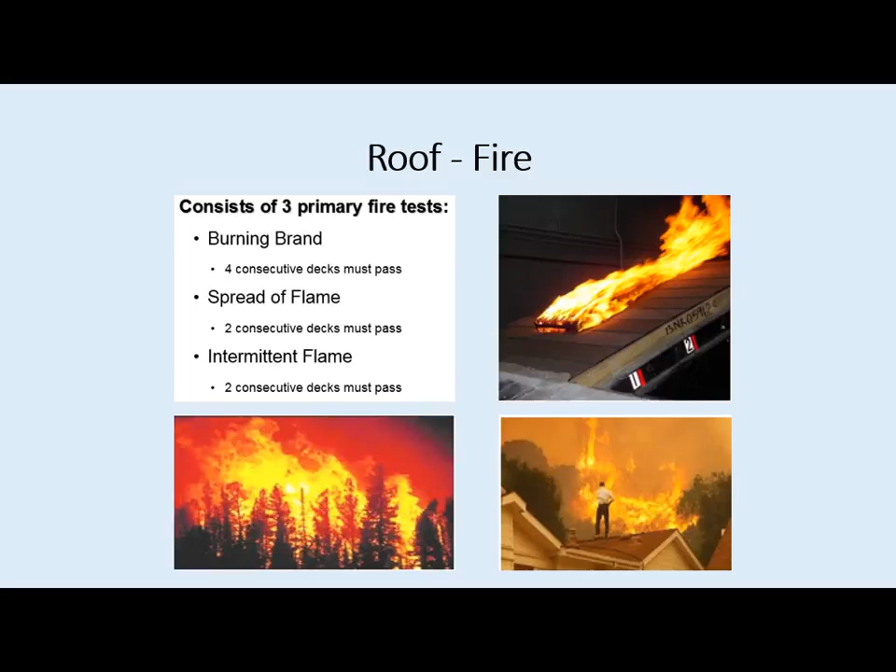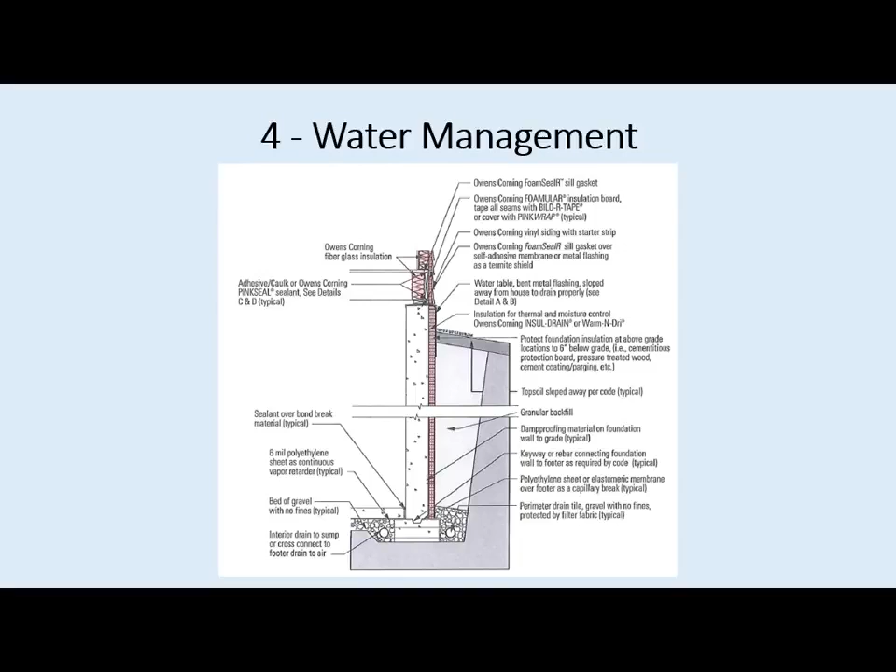Things you don't want to do: take all that water you collected from your roof, run it down your downspout, put a little elbow on the bottom and say job is done. All you've done is dumped all that water at your foundation, and you wonder why you have a wet basement.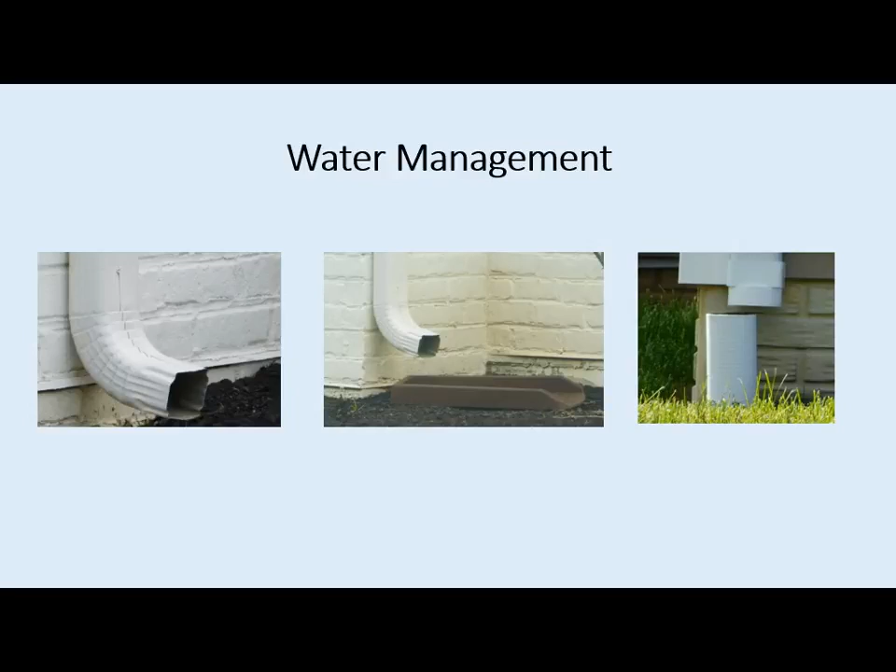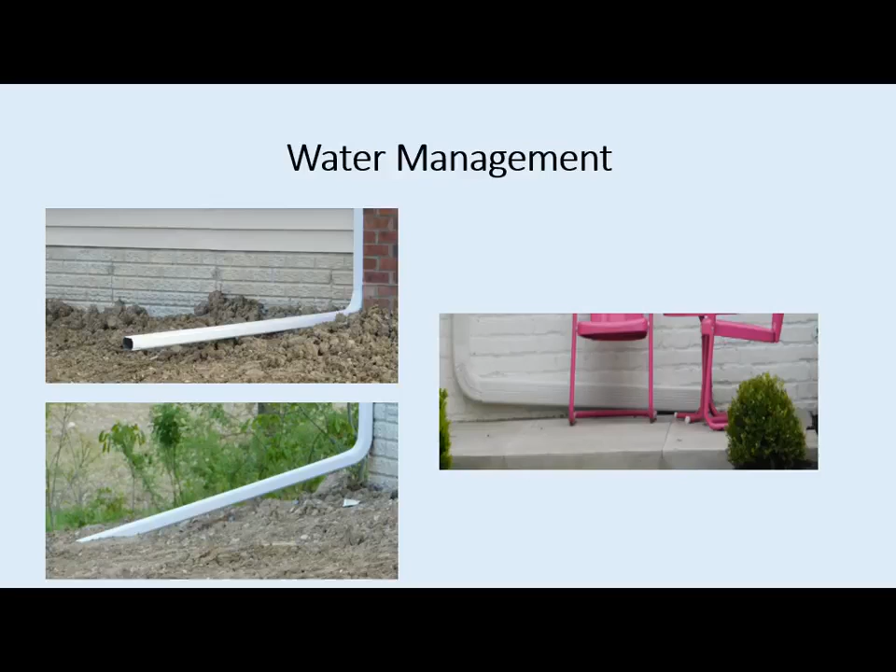Running it a little farther away from the house doesn't necessarily solve the problem either. So it's critical to pipe that water away from the house and connect all the joints that do that.

But there will still be water beside the foundation, so what we recommend is a drainage system on the foundation, applied on the exterior. This is to take the water and have it conducted down to the drains at the bottom of the footers.

The last area I wanted to quickly talk about is acoustics. The problem here is noise is unwanted sound, and the solution is to reduce or block that so it's no longer bothersome.

Now, this is something that most contractors don't design into houses. So if you're concerned about acoustics, you need to do this when you start with your contractor on day one, when you have a blank sheet of paper. Say, here's what I want to design.

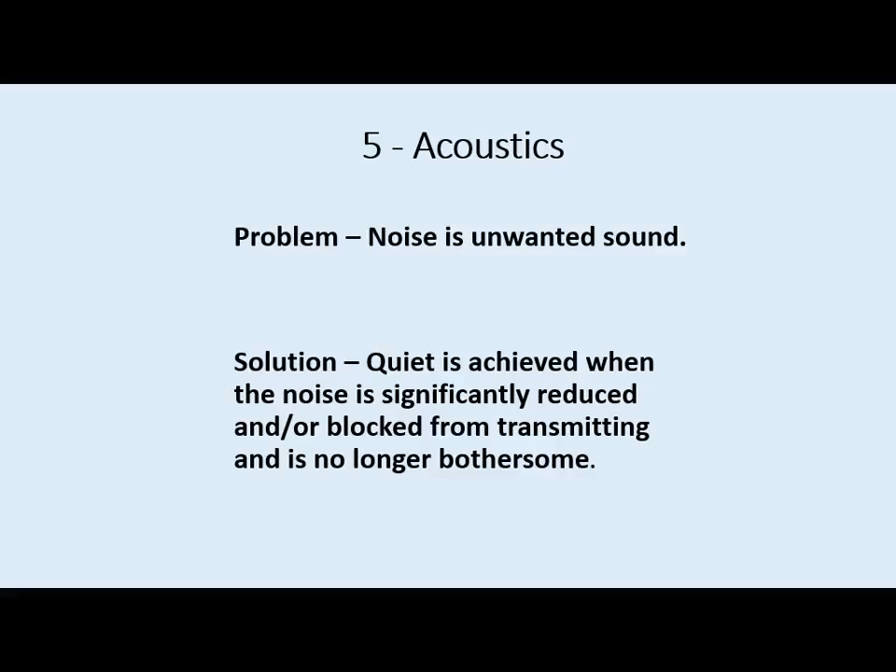So what do you want to do acoustic treatments for? Well, you might have a home office you'd like to have isolated, or isolate your bedrooms, or you have a dedicated entertainment room or home theater.

And where does the noise come from? Well, it can be exterior - traffic, airplanes, trains, lawnmowers from your neighbors. It can be interior - entertainment systems, exhaust fans. And as we're looking at house designs today, they're becoming more open concept, so you see that the kitchen, dining, and family room is just one big space.

There's no separation, so acoustically they're all connected. So you want to watch your favorite sports game, and all of a sudden the exhaust fan comes on in the kitchen, and you can't hear anything on your TV.

This is not going to solve that problem. If you need to have an entertainment room, it needs to be acoustically isolated.

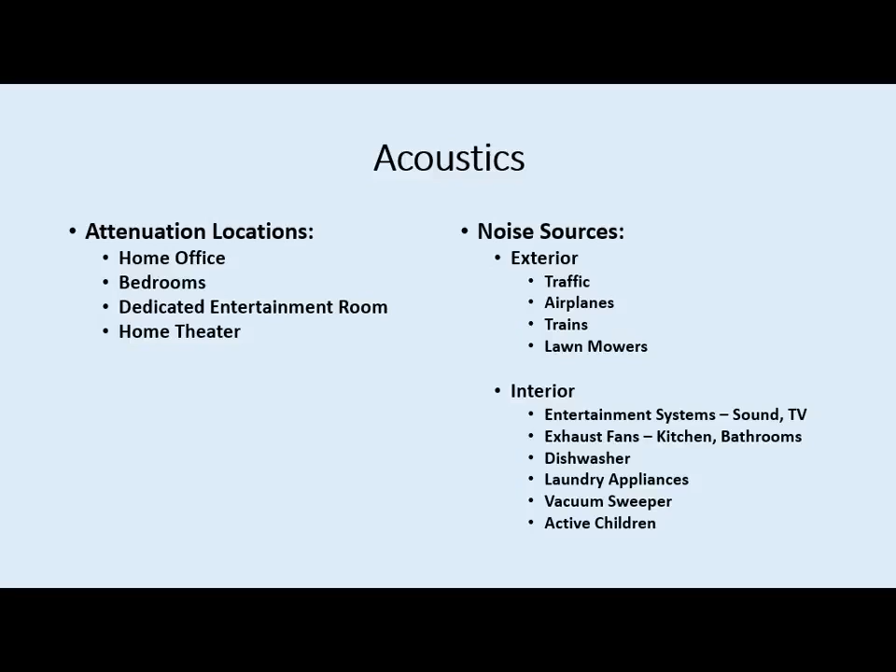So what do you have to target? Everything - ceilings, interior walls, exterior walls, floors, doors, ducts, plumbing, electrical boxes. You got to look at all of it, because sound is transmitted the same way air infiltration is transmitted, through the air. So there's solutions to each one of these problems.

For cavity insulation, you need to insulate all the ceilings, walls, and interior walls. So if you want to separate a bedroom from a room, you need to insulate that interior wall. Caulk all air paths, and if you want good performance, use double layers of gypsum.

Doors need to be solid wood core, not empty core doors. And you don't want them undercut for your return air vent, because that just allows all the noise to come through. So you want to have a ducted return, but you want that ducted return just to that one bedroom or one room.

You don't want to have a duct on one side or a vent on the same wall on the other side - it'll just allow the noise to come through. So it should be separated in terms of ducting.

Same way with electrical outlets - you don't want those backed up from one room to the next. Ducts should be insulated, windows should be sealed, floors need blocking between rooms, and plumbing should be isolated.

So the basic principles: you can absorb that energy, you can block it, or you can have vibration breaks or isolators.

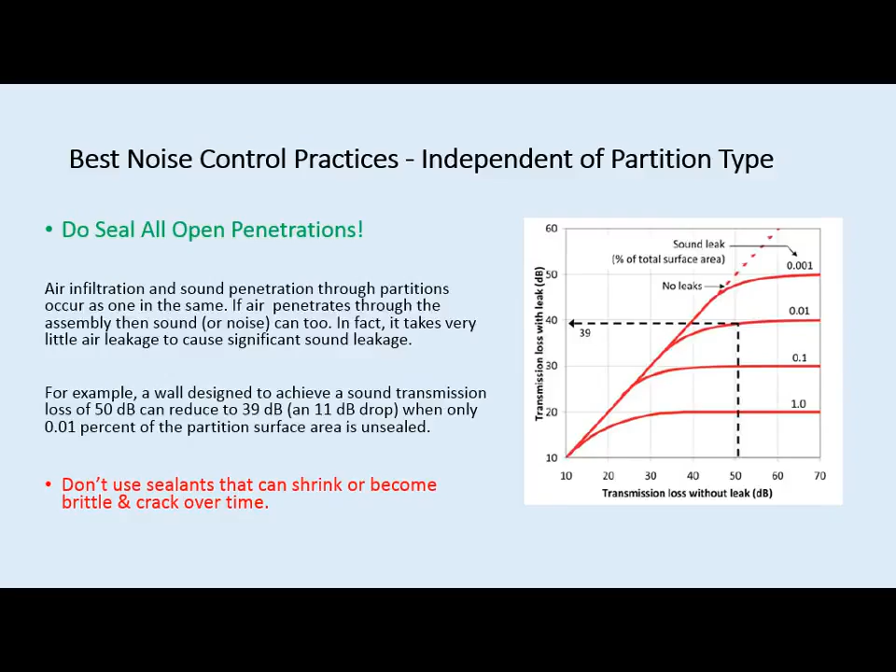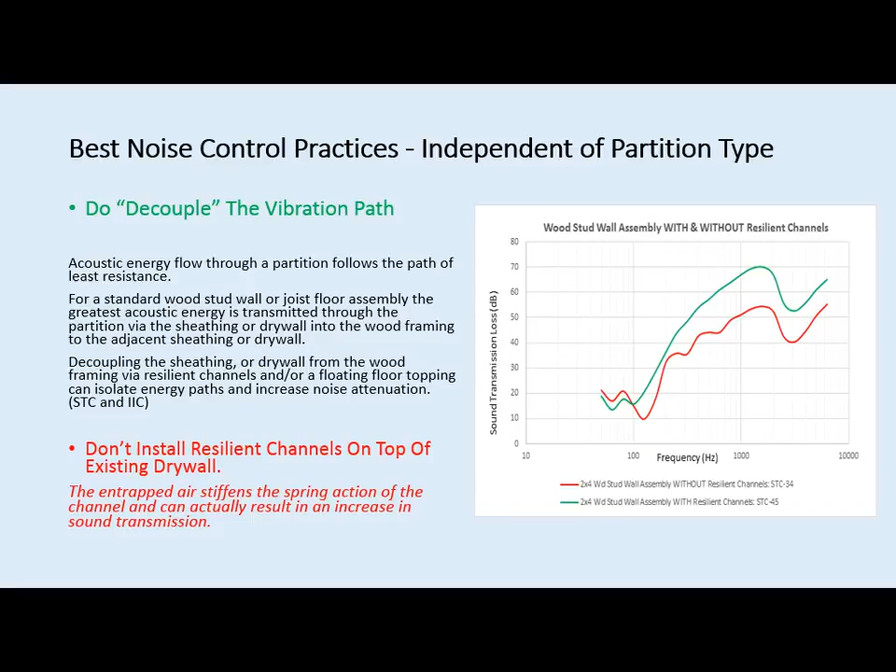You can decouple the vibration path between rooms with resilient channels or double studs, multiple options. You can also use cavity insulation to insulate interior walls.

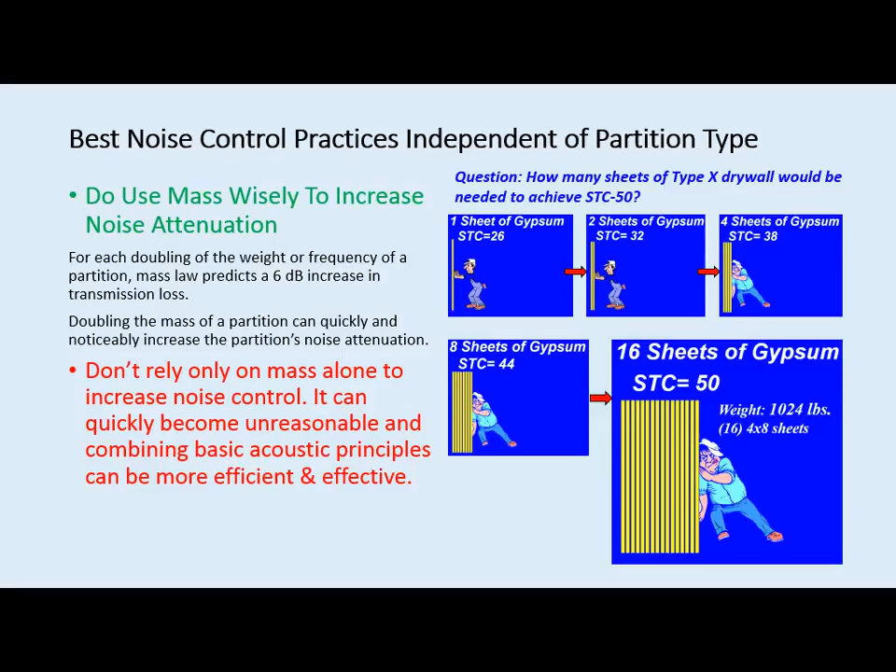And I mentioned earlier double drywall. Double drywall gives you some improvement, and some people think, well, if 2 is good, 4 is better. A little bit, well then 8 would even be better, but 16 would be ideal. Well, is your house going to support it? I don't think so. So there's an optimum design and how far you want to go with each of these features to achieve your end performance.

Another thing to consider is flanking losses. You think, well, I've got my walls protected, but now my floor is continuous. I design my house, I build my floor, I set the partitions on top of that. That floor acts as a channel for the vibrations to occur from one room to the next. So there's designs you need to consider there.

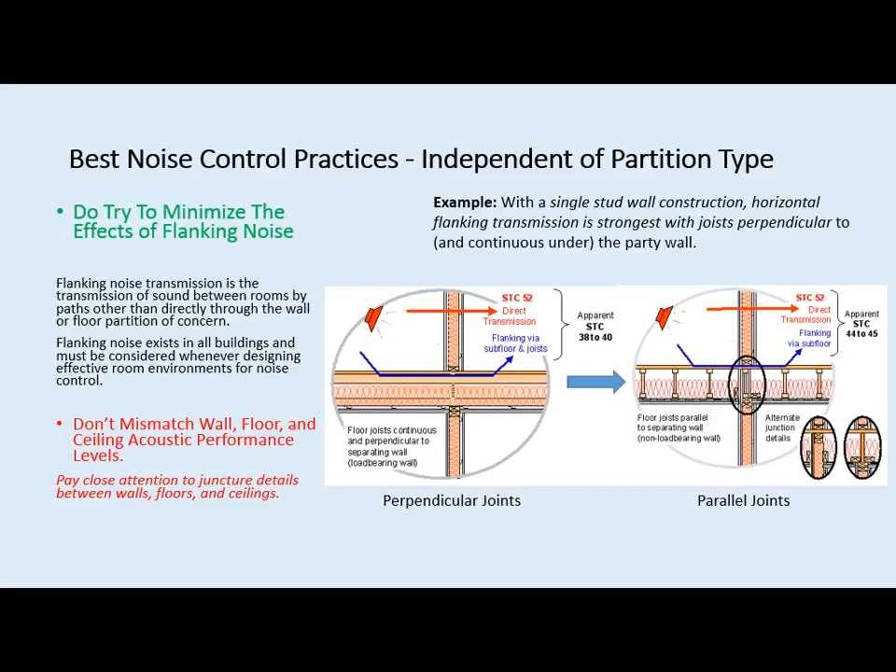So all these designs are never addressed in a conventional home. If you're doing acoustics, this is above and beyond normal. It's very focused. So just about running out of time, so I'll take any other questions that you have, if I haven't bored everybody to death yet.

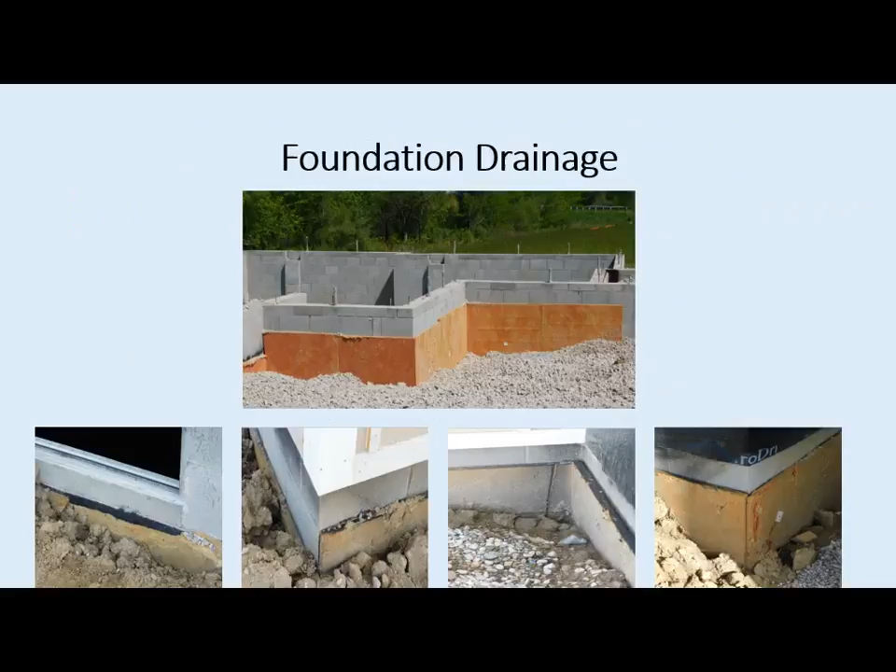Can we take a closer look at the infiltration, the various joints? Because you had them highlighted as most important to least important to reduce air infiltration. Yes.

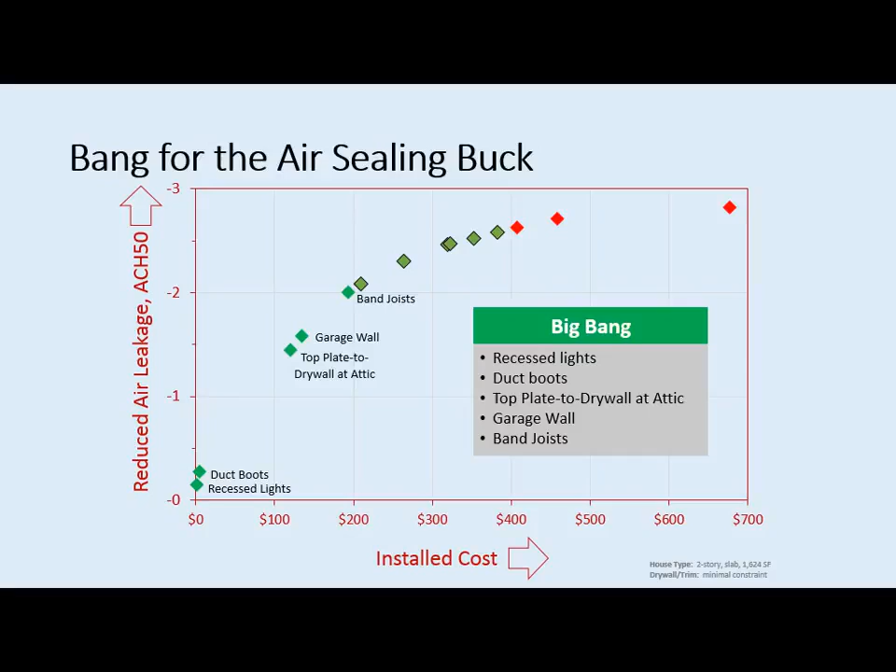All right, we start out with the most important thing to do: recessed lights that you have in your ceiling, and duct boots, connecting the duct to the register, need to be well sealed. Then top plate to drywall, a garage wall, and the band joist. Those are the things you need to look at first. Those were the biggest bang items.

Next items would be outside corners, top plate, inside corners. I showed you some of those corner details. Those can just be quite problematic. Bottom plates to the slab and to subfloors. And then the last item was between 2 top plates. When you're building the top plate, you usually put on 2 layers, so you need to seal between those 2 plates.

Wood framing to sheathing, and the vertical sheathing links on the outside, tape those. That's one of the last things that, if you've done everything else inside, you need to look at. Does that answer your question? Okay. Yes?

Is there any new advancement in terms of moisture management in your assembly? Absolutely. The requirement in codes for walls is to install a vapor retarder on the interior. And with the addition of foam sheathing on the outside, you need to make sure that you're not trapping moisture, because it will get through eventually. So there are recommendations on the balance between the R value of insulation in the cavity and the R value of the sheathing, and those are climate sensitive. So it's not a single answer.